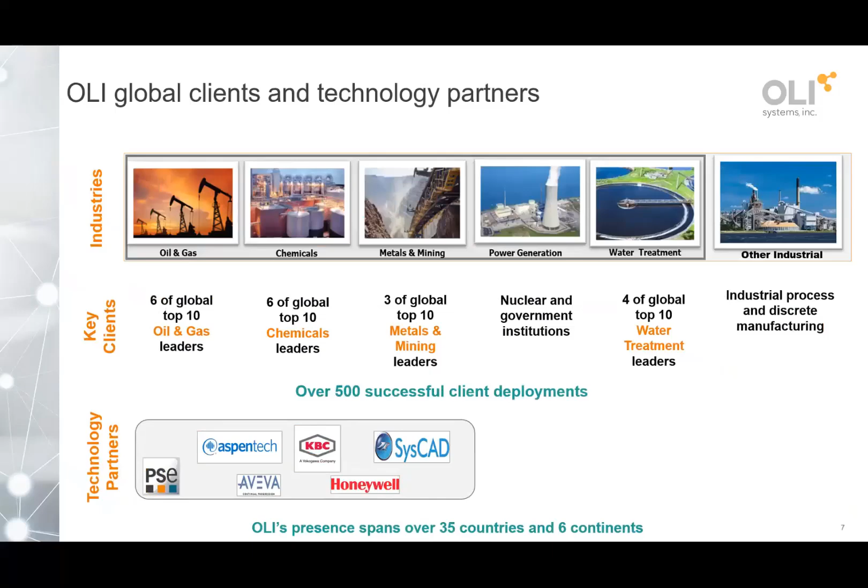So we also work with alliance partners. So we have relationships with AspenTech, with AVEVA, with PSE, KBC is a budding one that's going to be happening next year, Honeywell and SysCAD, so that when you're using us in the flow sheet environment, you can use us through one of the commercial flow sheet simulators.

What we like to say is it's the OLI engine that's delivering simulation power, and it delivers in a wide variety of products, as I showed you, right? So we have 3 different electrolyte frameworks that are available. The MSE framework, which has no concentration limit. It's our newest framework, and it has a lot of our newest chemistry.

MSE SRK, which is important if you're doing upstream oil and gas reservoir, especially if you're looking at extreme reservoir conditions, you really want to be in MSE SRK as opposed to MSE, because the SRK is being used for the dense phase and for calculating the hydrocarbons in the second liquid phase. So that's an important thing to remember.

And then finally, we have an older framework called the AQ framework, and Diana is going to take you through these frameworks in more depth, just to note that you will be able to really select the framework that makes the most sense for your case on a case-by-case basis.

OLI is well published. We're thermodynamicists, so we work with an equation of state and an activity model. We use the Helgeson equation of state. And for an activity model, it is a proprietary model, and it works with the minimization of Gibbs free energy.

Andre Anderko is our Chief Technology Officer. He was a postdoc of Professor Pitzer. And so you certainly will see Pitzer influence in our model, but it's not a Pitzer model, it's our own model. We published our models, actually, although I said it was proprietary, we published the equations in peer-reviewed papers.

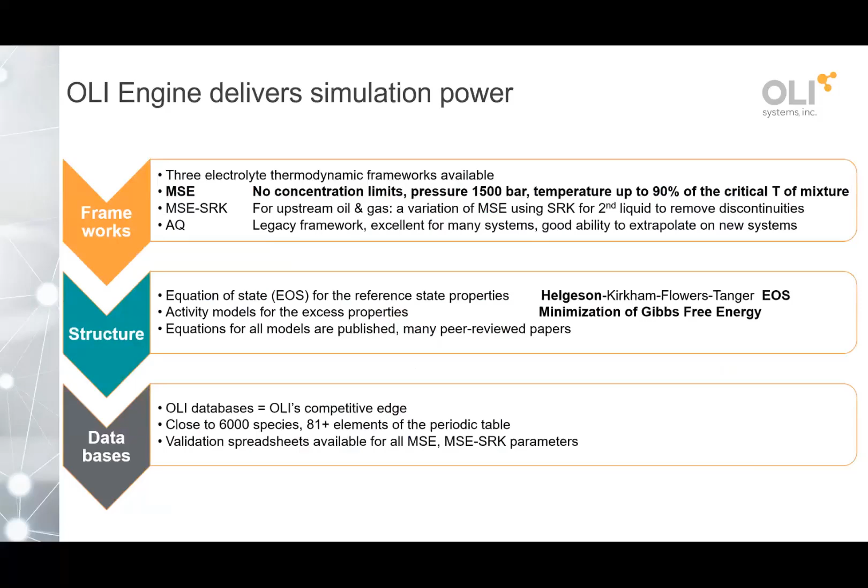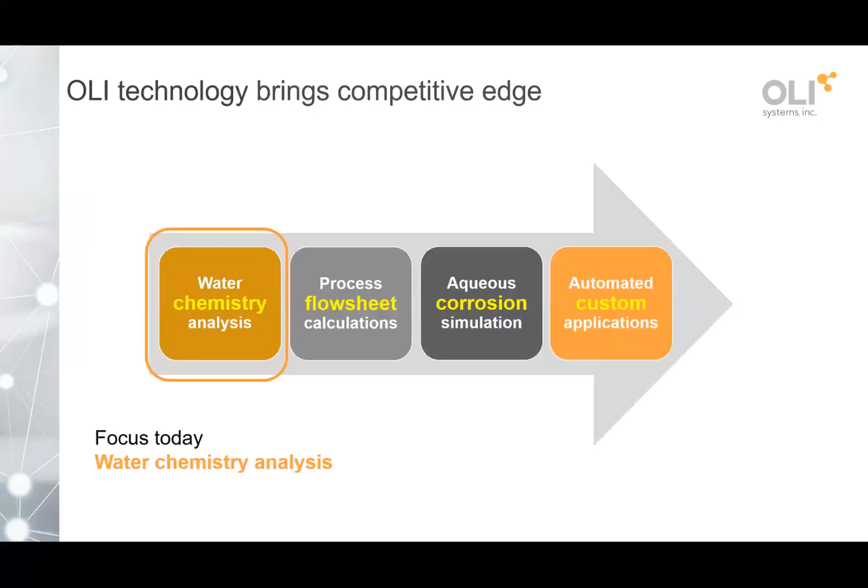So as I mentioned before, we bring competitive edge through either chemistry or flow sheeting or corrosion or custom applications. I'm going to just talk a little bit about each one in more depth. So, water chemistry analysis. This is the Stream Analyzer. We like to say it's a virtual laboratory on your PC. You get a blank slate of components, and you describe the components and the conditions, and we, in essence, run the experiment for you.

Remember that it's equilibrium based. It does distribution between solid, liquid, vapor, and second liquid. It predicts accurately on a multi-component system basis. Now, that's really important to keep in mind. A lot of our problems are going to be with few components so that you can get the calculations very quickly. But keep in mind that you can add any unexpected components, because what the OLI framework does is it takes binary first and then ternary systems, and it combines them together for what Andre likes to say are reasonable to accurate results when you put everything together in a multi-component system.

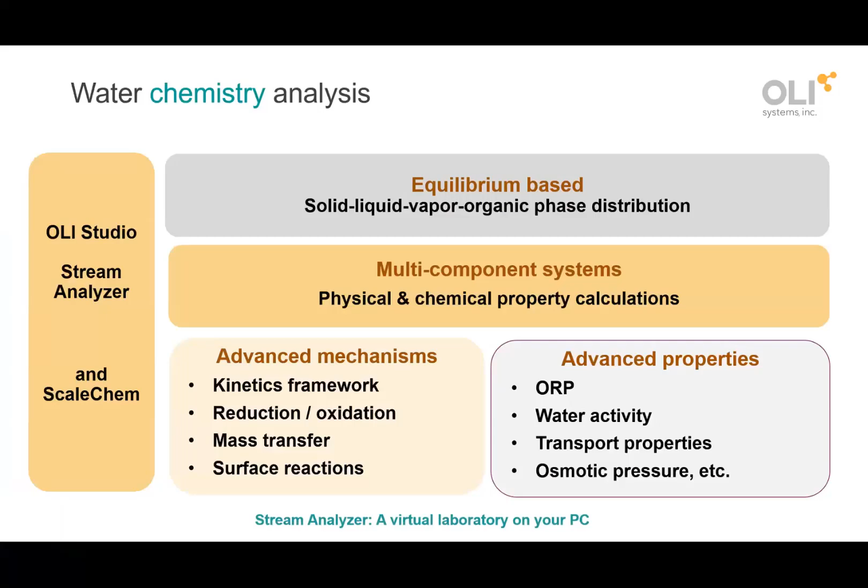What that means is very different from a system that has to be interpolated together or regressed together, so some simulators will give you an insert. So here's the way we understand potash chemistry, or here's the way we understand sour water stripping. But if you have, for example, water treatment, and you have an unexpected component that you are dealing with, you don't have to re-regress. You don't have to worry about whether it's outside the range of the model, because the model works mostly by adding components. So that's important to know. Lots of advanced mechanisms and advanced properties. I'm going to let the class speak for itself there.

In terms of process flow sheet applications, we have really two choices. We either can use an Alliance Engine when you're working with other thermodynamics, or when there's other features that you need in one of our commercial flow sheet simulators, or you can work in Flowsheet ESP when electrolytes are primary. This class is not about flow sheeting, but why do you use flow sheeting? You use it when you have multiple steps in an operation, or multiple units that you want to model, when you have controllers or recycle, and when you have multi-stage capabilities.

We have lots of Alliance Engine partners, and we have our own electrolyte system geared for industrial water treatment, where we have things like evaporation, crystallization, and membrane processing that are a little bit tailored for electrolyte processing.

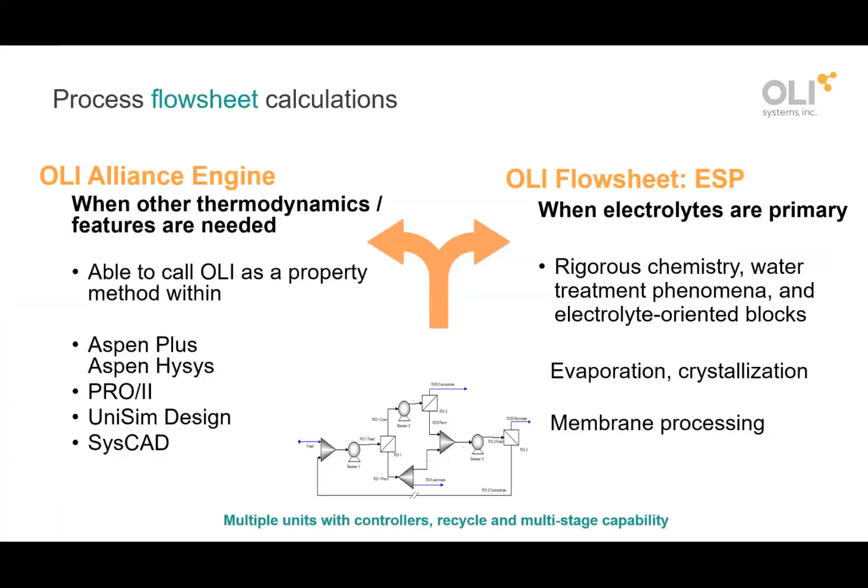I'm going to get this right before too long.

Okay, we also have corrosion simulation, which we might cover at the end of the class later on in day 2. If there is interest, we can take a quick look at it. But this class is not going to be about the Corrosion Analyzer. But keep in mind that we have different ways of predicting corrosion, either general corrosion or localized corrosion. We have stability diagrams, and also an EVS calculation, calculating remaining assets. And if you are interested in that, we can certainly work on that separately, not in this class.

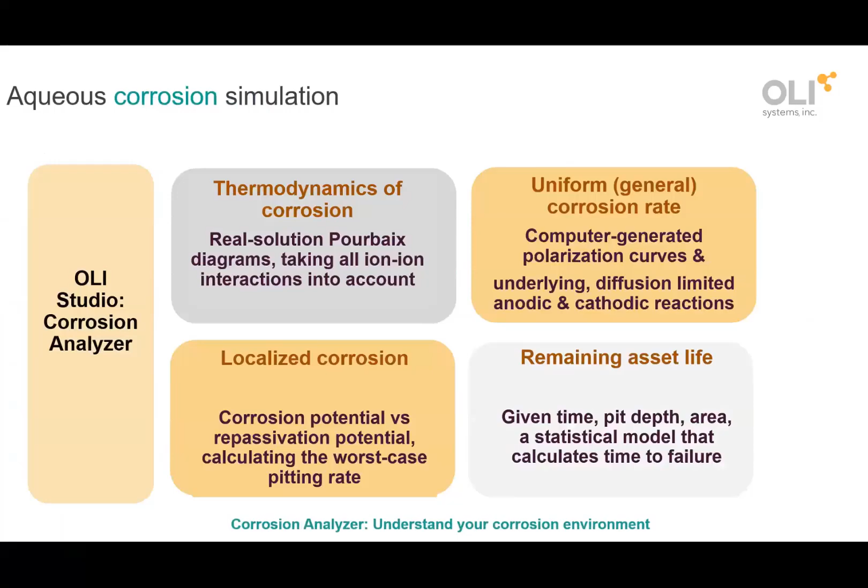Finally, we do custom calculations. This graph is quite interesting.

Excuse me? I'm sorry, I thought someone was speaking.

Because this little box down here represents OLI today. When I first saw it, I was offended. You know, OLI today actually does a lot. But what this really is trying to say is that you are water chemistry experts, and you are working with the software at this level, but we really can go beyond this level into something that's more automated, where we can do some kind of red, yellow, green flag indication of whether you have a scale that's about to form, or if the scaling tendencies are high.

We can move into different levels of cloud performance, and really our goal with OLI is to get into predictive maintenance facilities, become part of the Internet of Things, and really help clients make digital twins. So this is really OLI's vision for the future, and we are seeking partners. If you are interested in moving past the desktop capability that you have today into some of these automated areas, please let us know, because that's something that we are also interested in doing.

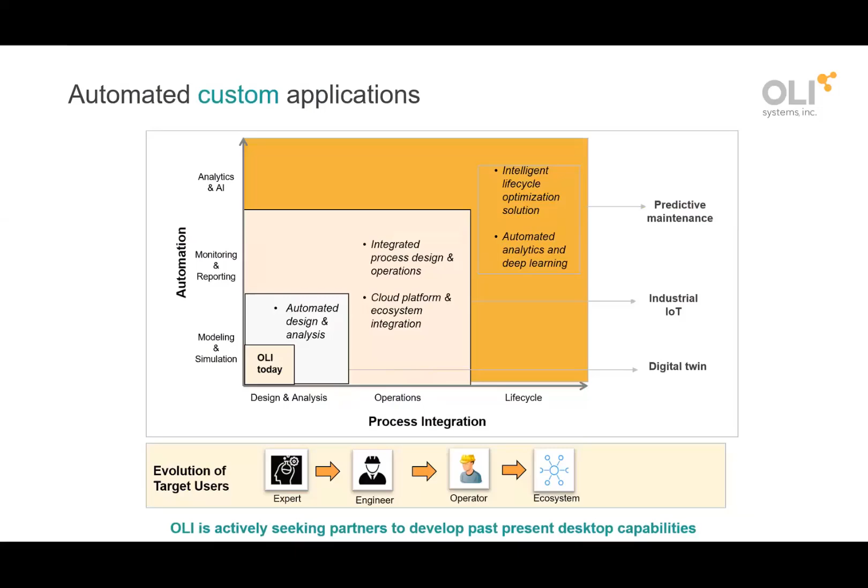Two more things I'd like to say, maybe a few more slides, but the key to simulation, and what we're going to be doing in this class, is interpreting results. Always, that's the issue.

Process simulation is pretty easy - well, not so easy - but you can get some input that you consider representative. You run it through the software, consider it a black box, get some output, and then you really need to ask yourself, am I modeling the physical process that I have? If I am, I'm in a really strong position to make recommendations and come back in and make modifications. This is really where we want to get, but we can't get there except through really the ground of interpretation.

So a lot of what you're going to learn today in the class, you're going to learn how to set up the software, how the software works, which features it has. But really, a lot of our focus and why we call it electrolyte modeling basics is so that we can understand how to interpret the results. Because that's really where you're going to get the power of simulation - when you start to understand, yes, I am modeling my physical process, so I can predict what's going to be happening tomorrow.

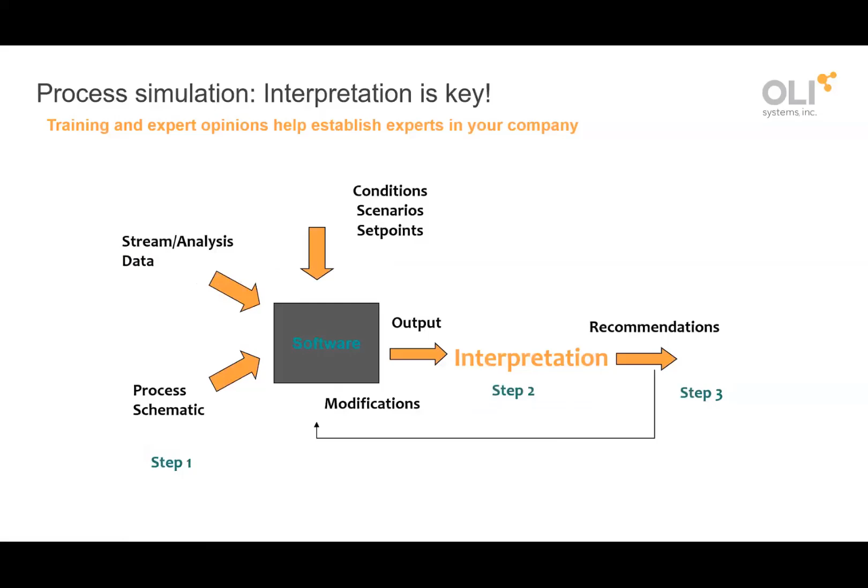So that's an important thing for gaining confidence in the system. If you can see that OLI has actually worked with data sets that cover the span of the range that I'm in, this looks like a credible result given what I see from the validation plots. So that's how we use them, and it's something to keep in mind.

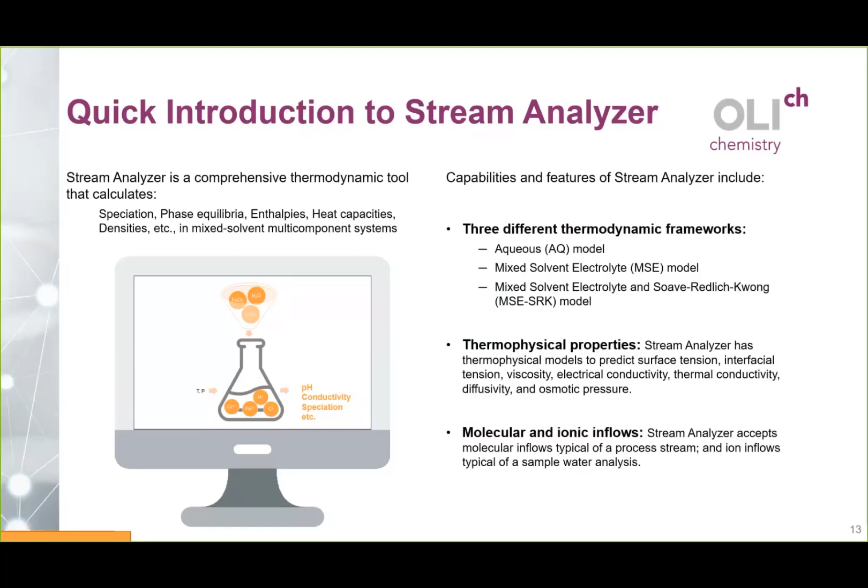So the first thing we are going to learn this morning, or this afternoon depending on where you are located, is the user interface. In the OLI Studio software, we have the OLI Studio desktop user interface, which provides the environment to create, analyze, and interpret the results of your application chemistry. I will give you an overview of the different windows and tools that you will be able to use within the software, as well as how to navigate the OLI Studio user interface.

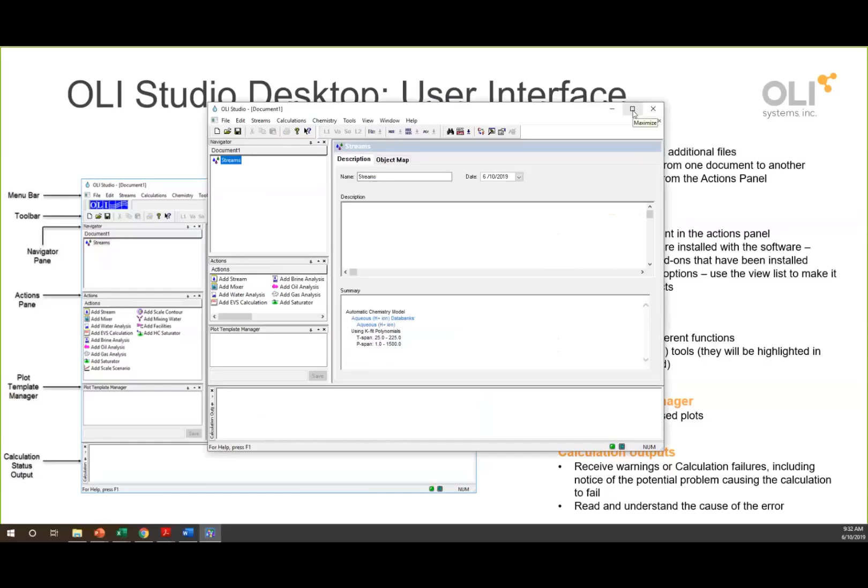If you have installed the software, you should be able to see the icon of OLI Studio 9.6. Just click on the icon, and this will bring up this screen, which is the OLI Studio interface. I will maximize this window just to make sure everybody can see it.

Does everybody have the software open at the moment? Yes? Yes, okay good, that's good. Okay, so let me just quickly go back to the presentation here.

I will start with describing the navigator panel. In this navigator panel you can open or add additional files, which makes it possible to access different documents very easily. So in here you create a new document, or you can always go and open a previous document you have worked on before. Let's say you open this new document in here.

So you can always access very easily several documents using the navigator panel, as you can see. You can open several documents in this navigator panel. Now this navigator panel also contains the list of streams and the different calculations that are active within the file.

You will find four different levels of calculation. The first level is the global stream level. In here, when you click here, you will be able to set up units, the name style of your components, and the general preferred options.

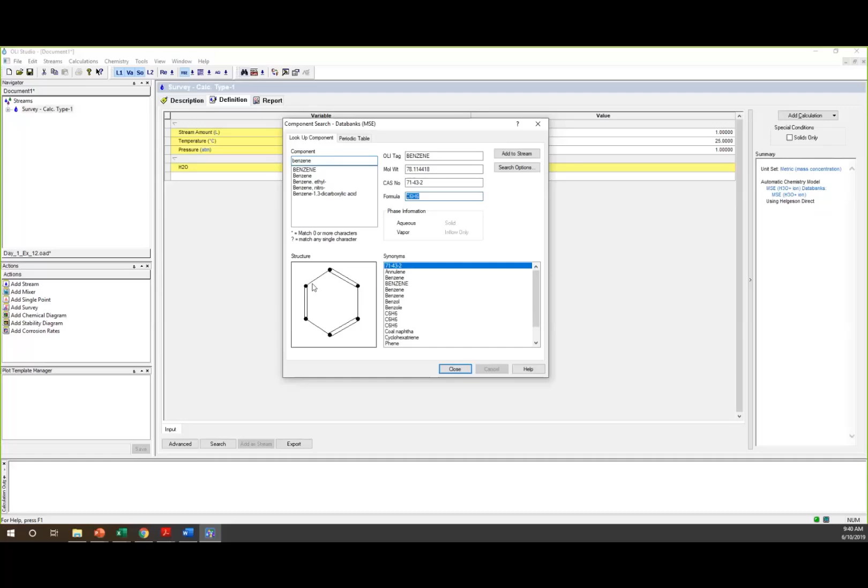Whenever you are working, for example, we have selected here the MSE data bank, so it's going to search a component within this data bank. If you want to know if the MSE has benzene, for example, you can type benzene, and it finds the component in the software, letting you know the molecular weight, the CAS number, the formula name, etc. You can always make sure if a component is in our database using this component search option.

The next tool that we will use a lot is this names manager. It looks like an NaCl icon.

So we have the names manager. This allows us to change the way the component names will appear on tables and reports. We have three different types of style options: the name, the formula name, or the OLI name.

Finally, the one that we will use the most is this units manager, which allows you to change to preferred units for your calculations. You can click here in the customize button, and then change if you want units in volume, concentration, mass fraction. You can always edit this just by accessing the units manager button here.

So that is the bar that we have, the quick access bar up here.

Now you also see this plot template manager to the left. This is an option where, when we are plotting a lot of different results, you can save and have access to commonly used plots. I will show this later also in the course, how to use it.

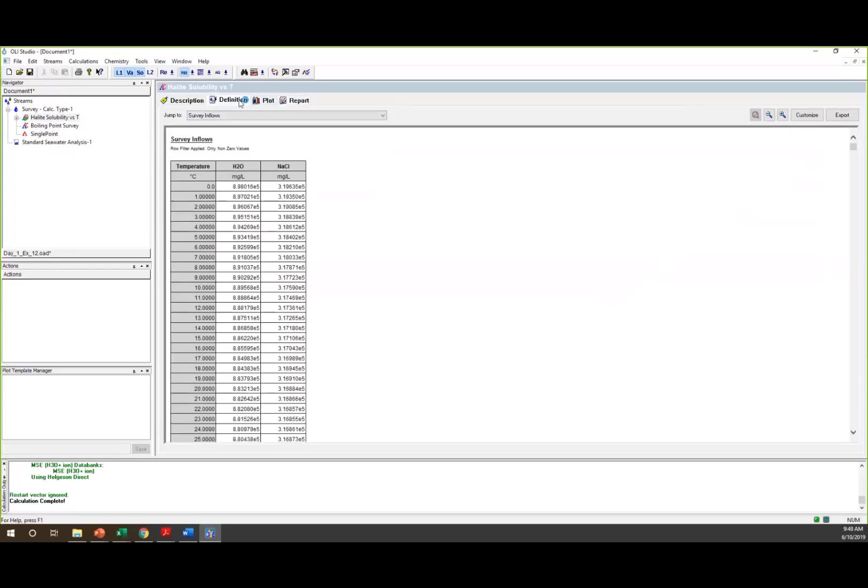And also in the workspace, you will find the summary section, this small white area to the right. In this summary section, you will have a quick summary of the stream definition and also a quick summary of the results of your simulation.

So this is only for the survey calculation, but you will see that whenever we are doing corrosion rate or a Pourbaix diagram or water analysis, these tabs up here will change. As we go in the course, I will introduce and explain each one of these tabs for each calculation type. Most of the time, our workspace will look very familiar, but I will make sure to introduce new parts that we see as we go in the course.

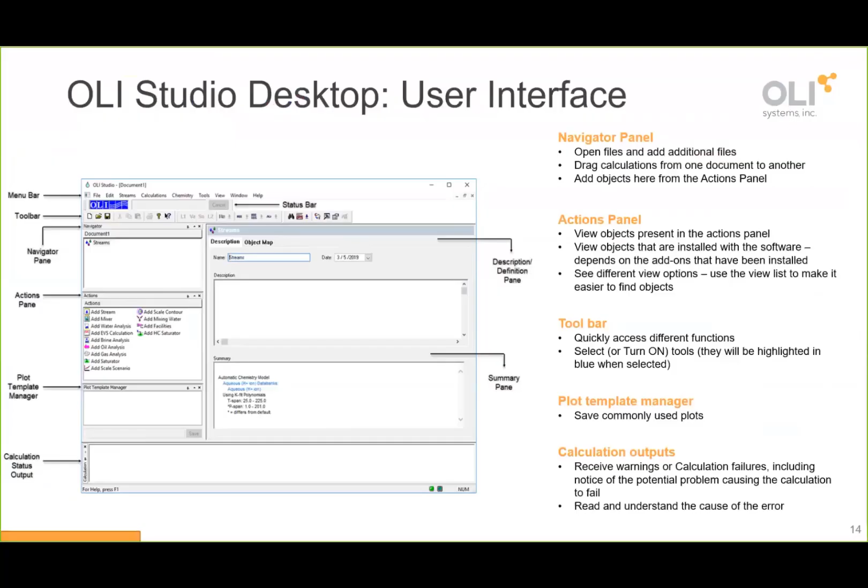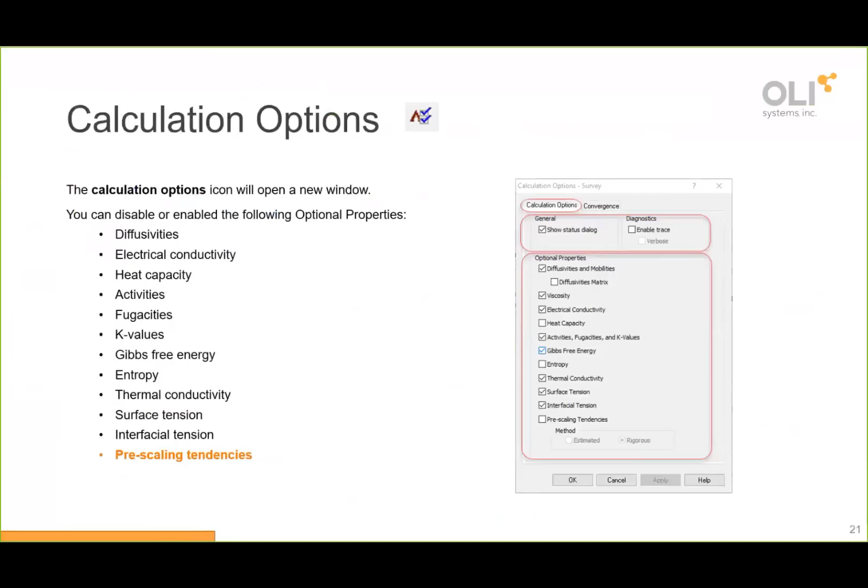Okay, so this is what I already talked about, the toolbar, the names manager. You will have these slides for future reference too, so that you remember where to find all of these specific options. This is the object library, the workspace.

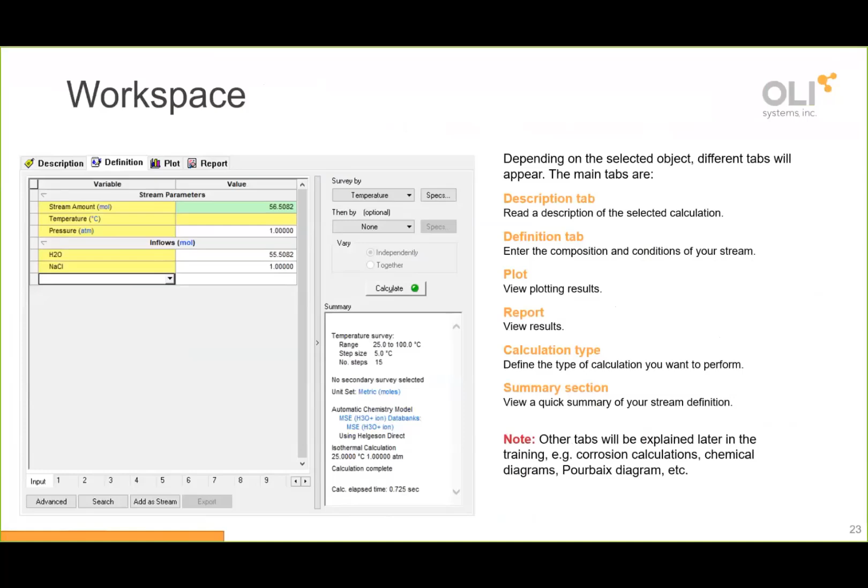If the water content is less than 70% of the stream, then it would be a good idea to use the MSE framework. And this is a preferred data bank when we have very saturated solutions. So if we have a very concentrated salt solution, the MSE is the framework to select.

And finally, we have the MSE-SRK. This MSE-SRK was developed specifically for upstream oil and gas applications that contain light hydrocarbons like methane and also CO2 and H2S, and when we require high pressures above 80 atmospheres. So this framework will be only for upstream oil and gas applications, and when we are dealing with normal temperatures and pressures, then we can either go with the AQ or MSE.

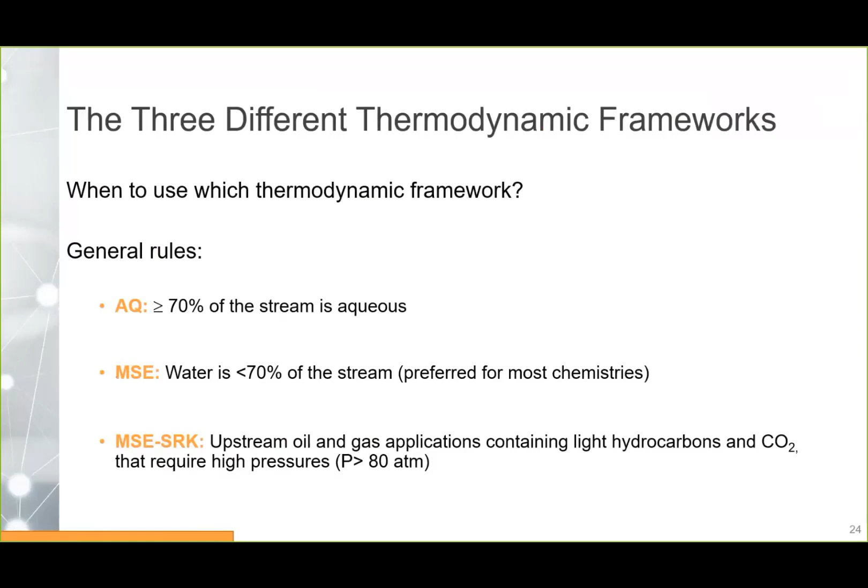Currently, OLI is developing a feature that will help the customer to select the best framework for his or her application. So it's coming up in a future release, but at the moment this is just a general rule that I personally use when I'm doing simulations. Okay, so this ends the presentation part about the user interface in OLI Studio. We will have more time to go through it, and with the examples, we will get more familiar with it. And now we can start doing work in the software.

But, okay, so it's 9:53 a.m. Pat, do you think we should get a break before we... I would actually see if we can go a little bit longer to do the first calculation and then break, because we're waiting to get into the software. And it won't take you that long.

This add water analysis is another way to create a stream, but in an ionic form, and then we will be able to do what we call a reconciliation calculation. And for the corrosion analyzer tool, we have the add stability diagram option and the corrosion rates. So we will start with single point calculations. Single point calculations are used to find information at one specific equilibrium state. These are the simplest set of calculations in the software, and we have 13 of them. And we will cover the majority of them.

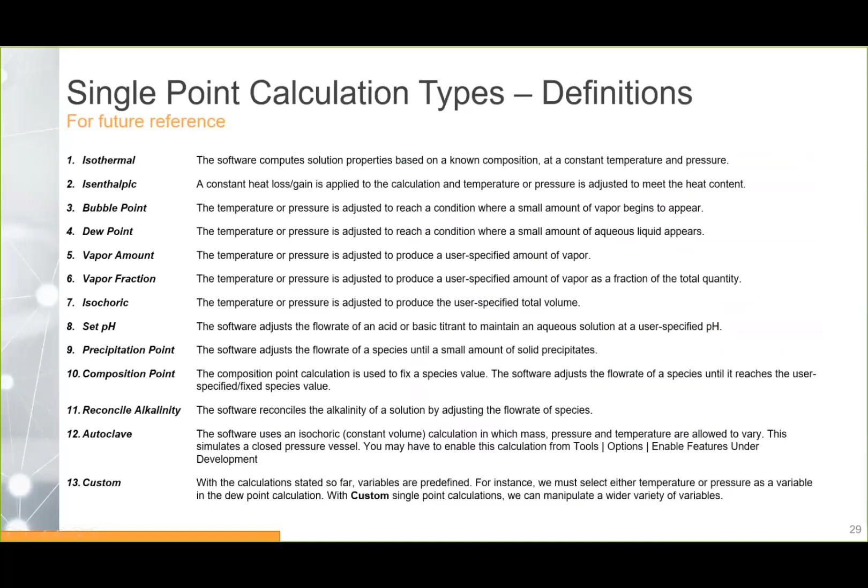I'll cover isothermal, bubble point, dew point, vapor fraction, precipitation point, set pH. And in here you will see, this is for your reference, if you want to remember what an isothermal calculation is, a bubble point, composition point, etc. So again, you will have it here for future reference. So, okay, let's go into our first example.

We will calculate the properties of a 1 molal NaCl solution. So I will show you how to set up this isothermal calculation, and then we will explore where to find the results of the simulation. So let's start with a new document here in the software. So let's bring the software. Oops, what happened here? I'll just start a new document. And the first step is to add a stream.

So we click on this, see my actions panel went away. When we click here in the global stream, we will be able to see the add stream icon. You can add a stream either by double clicking this add stream, or you can also go to Streams, Add Stream, and it will add a new stream. Okay, I don't want this extra stream, so I will right click and delete it.

And once we have created this stream, we can change the name to isothermal calculations. To do that, you can either select it and then hit the F2 key, and it will allow you to change the name. You also have the option to double click on it and change the name. Right click is the other option, and then rename. Or you can go to the description tab, and then we can change the name here to isothermal calculations.

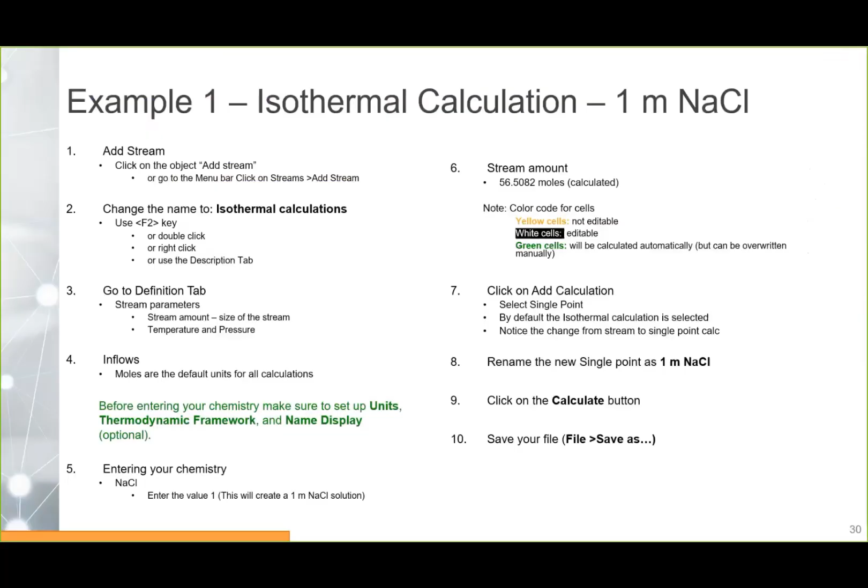Okay. So the next calculation that we are going to do, and I would like that everybody just follows with this calculation, is the isothermal calculation for 1-molal iron chloride. We are going to add a single point calculation, and we are going to name it 1-molal iron chloride.

And before we do the isothermal calculation, could somebody give me an idea of the pH of this solution? What do you think would be the pH of a 1-molal iron chloride in water? Somebody wants to guess? The previous calculation, we had a pH almost 7. We'll go with 6. You would say 6. JC says 1. Oh, wow. Okay. And Jan says 6. Okay. So let's set up this.

So if we click on the isothermal calculation, then we can add a single point, either here or add calculation. Let's name it, double click on it, 1-molal iron chloride. And I want you to notice that when we set up this isothermal calculation, the NaCl and the 1-molal was editable. It's in the white cell, so you can edit this. But once you add a new calculation level here, then the NaCl is in yellow. You cannot change this. However, you can continue adding more chemistry here.

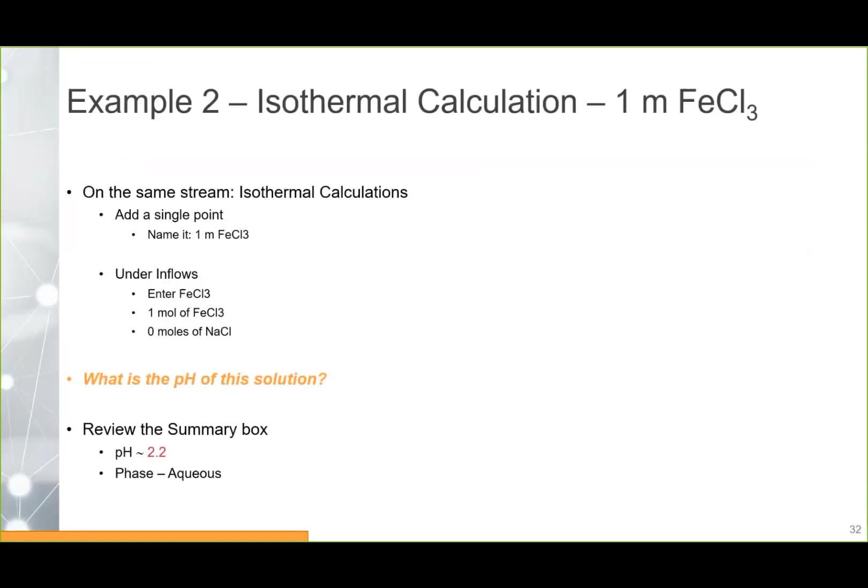Definitely the pH is very low. This is one of these salts that when they react with water, we have these hydrolysis reactions, and they form this Fe3+ in solution. This Fe3+ then reacts with water and starts to release H+ in our system. And this H+, as it increases, as we dissociate this iron chloride in solution, then we have more and more hydrogen in our water, so our pH is going to be very low because of this minus log of the concentration and the activity coefficient.

Now, the software is not only calculating this concentration of hydrogen plus in solution, it's also calculating this activity coefficient, and that is how the software is calculating this pH. Okay, so let me just go back to the software.

We can go to the report, and in the report let's go to the output tab here. If we right click on this output tab and then go to sections, then go to the aqueous section here, you will see all of the different speciations that the iron 3+ causes.

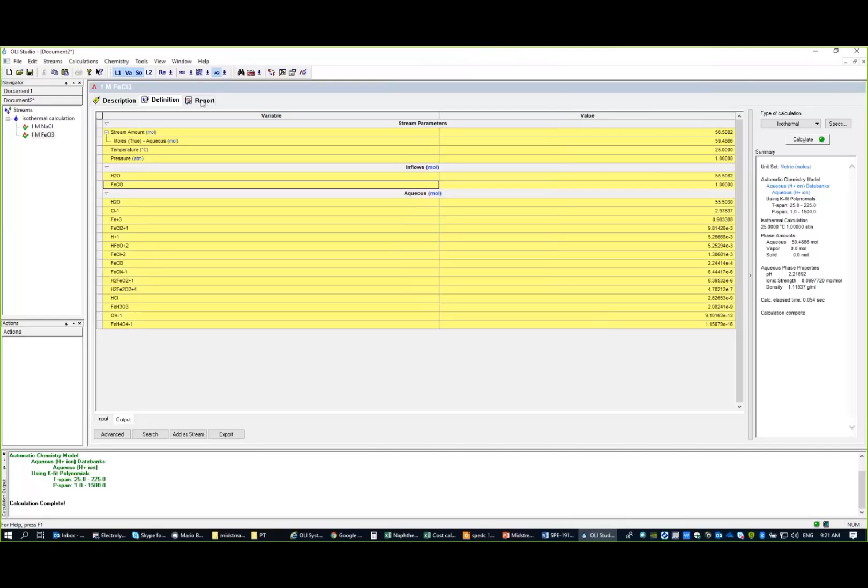So, for example, if you want to see the species, what you need to do is scroll down and you will see the species right there, and the concentration.

So Diana, if you want to see these species in percentages, is that possible, as opposed to whole numbers? Yes.

Yes, definitely. Jan, could you please scroll down really quickly? I just want to see one thing. You can also analyze, you see the element distribution. Well, this will be specifically for element distribution, but what you can do is always change the units.

And instead of saying show me moles, you can always show the mass percent, mass fraction, mole fraction, etc. You will be able to see that when you select that, and there will be tables where you will see the percentage of the total for each one of the species.

Let me see if I can just, okay, I'm going to take control back, and then I will share my screen. Yeah.

Share content. Okay, this is my screen. Let me see if I change the units manager to mass fraction. So let's apply this.

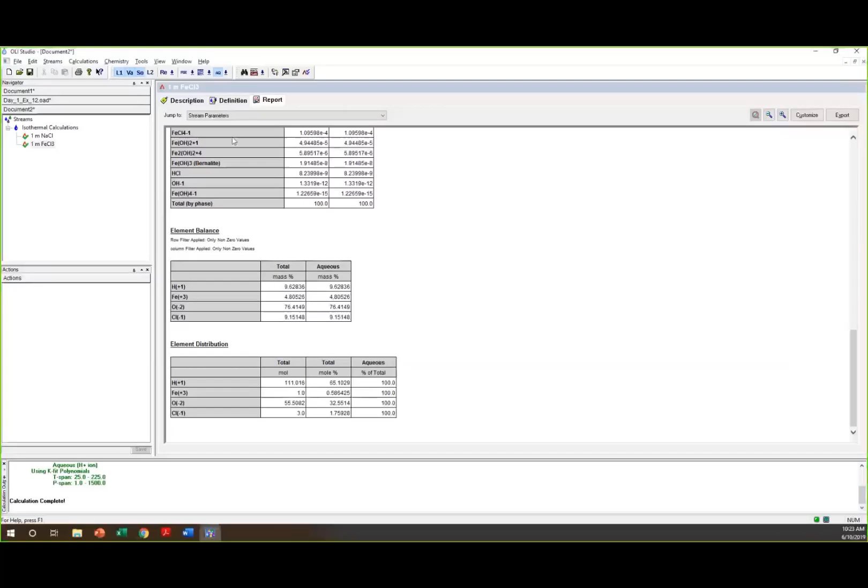And I was talking here like, oh, click here.

Okay, so when you go to the units manager, you can always change the metric batch and mass fraction units, and this will change all your units. Then you go to the report, and here you will see all the species as a mass fraction, mass percent. You will also be able to see the element distribution, the oxidation state of every single element, and the total percentage.

That's perfect. Thank you, is this what you were asking? Yeah, absolutely. That's okay, excellent, that's great. Thank you, okay.

Okay, so it's important that we get very familiar with the isothermal calculation, because once we get comfortable with it, then we can move to more specific calculations. So this is the isothermal calculation, okay.

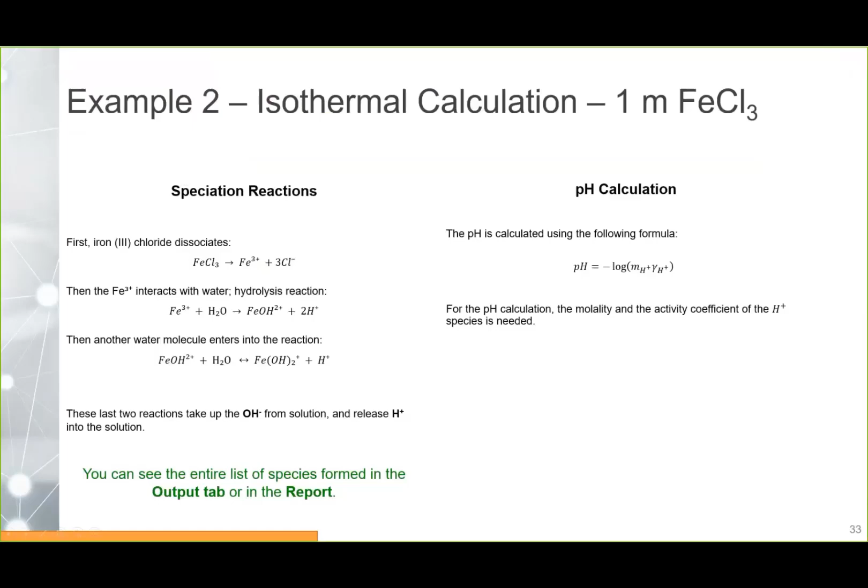So now we are going to transition to the phase equilibria calculations. The next examples I'm going to cover are the bubble point, dew point, precipitation point, and the vapor fraction.

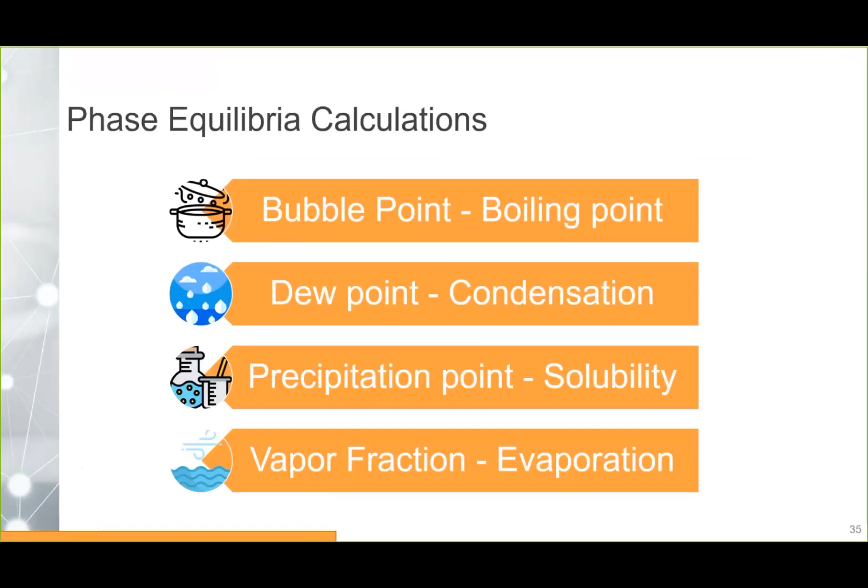The bubble point is whenever you want to know what is the concentration effect on the boiling point or the dew point, so you can study that. The precipitation point is where you want to understand the solubility of a specific salt in water. And the vapor fraction I find very important, because sometimes you want to do an evaporation step and you want to analyze what solids precipitated out. So those four are the next calculations we are going to cover.

So example number 3 for today is bubble point. We will start by computing the bubble point temperature of a 6 mass% acetone solution at a constant pressure. So this will be under isobaric conditions. Then we'll change the calculation to the bubble point pressure at a constant temperature.

Okay, so let's go back to the software. The next step, or the first step we need to do, is to add a stream. So double click on add stream, on the add stream icon. So we have a new stream. Okay, let's rename it bubble point.

And for this example, let's use the MSE framework. So click on the MSE framework. Okay, and now let's enter acetone in the inflows. So let's just type acetone.

Now I want you to notice something here: the software immediately changed the name to the formula name. If you mouse over the name, you will see the different names, the acetone formula name, the OLI name. And if you don't like how the software is presenting these names, you can always go to the names manager and say, display my name, because I feel more comfortable reading acetone than CH3, etc. So let's leave the default name for this example.

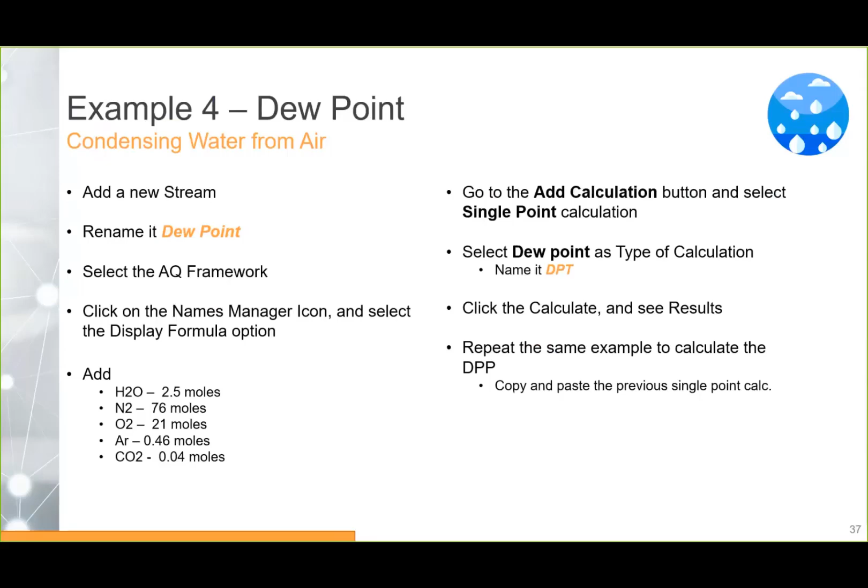I know that the dew point is also very useful in corrosion studies. People want to understand the composition at the dew point, or the first drop of water formed, because once they know that specific concentration, they can predict the corrosion that can happen on a pipeline. That's another application of the dew point.

So for the dew point, let's add a new stream and name it dew point. I will use the AQ framework for that. For the names, I want to go back to the formula and enter the following components. So we have water, I want to enter... yes?

So if we're modeling gas, wouldn't we want to choose the MSE framework? Yes, we could also, actually the MSE framework would be the best one to use for this specific example, because we have water, though we don't have very much amount of water in the stream. So let's change it to MSE. Yes, you're right, MSE would work better for this case.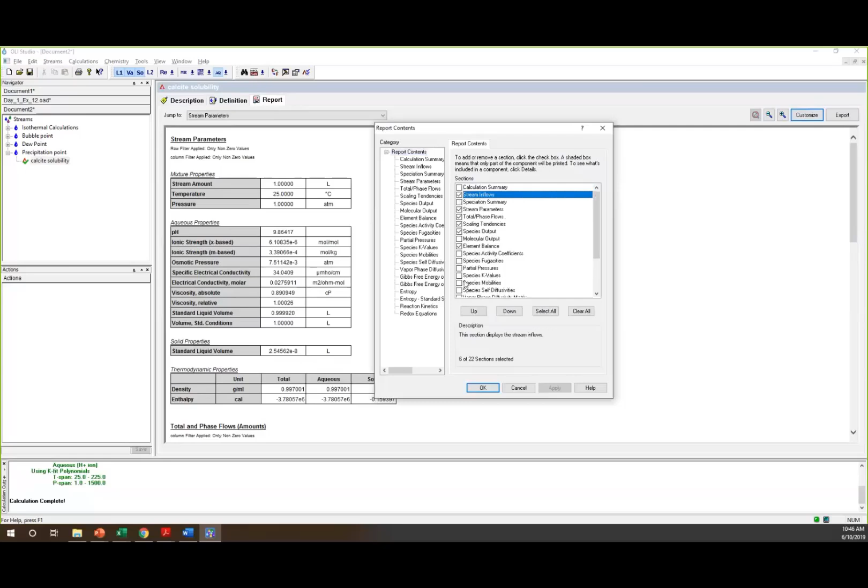So again, in the stream inflows, it says in my output what the software had to add was 12.34 milligrams per liter of calcium carbonate to precipitate a small amount of calcite. And down here, in the total and phase flows, you can see that the solid is also a very small amount, set as 1 times 10 to the minus 8 of the total stream amount. It's always going to be a very small amount for the software in order to calculate this precipitation point, the dew point, or the bubble point.

Okay, any questions about this precipitation point calculation?

You can also find here the pH is very high for this calcium carbonate solution. Okay, so I will assume this precipitation point is clear.

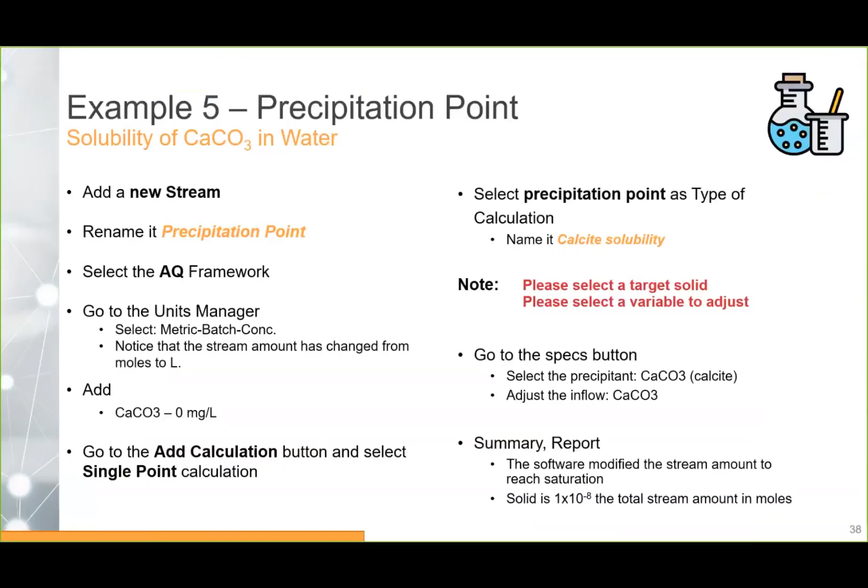Now we are going to move to our last calculation for phase equilibrium, and that would be the vapor fraction. The vapor fraction calculation allows us to set a specific fraction of the total stream in the vapor phase, so this type of calculation can be seen as an evaporation step. This calculation is very identical in nature to the bubble point calculation, except that instead of the software defining the vapor amount as 1 times 10 to the minus 10 of the total stream, the user defines the vapor size in either mole fraction units, that will be the vapor fraction, or mole units, that will be the vapor amount.

So to illustrate this type of calculation, we will evaporate a brine to study its final composition. So let's go back to the software and let's add a new stream. And we are going to name this new stream as evaporation. Okay. We can select here the AQ framework, and I want to change these inflows

units to mass fraction. You can see that there is a hyperlink here, and you can click on it, and that will bring immediately the units manager for this calculation, and I want to change those inflows units to mass fraction. So I select mass fraction, and this will be the unit, and then click OK.

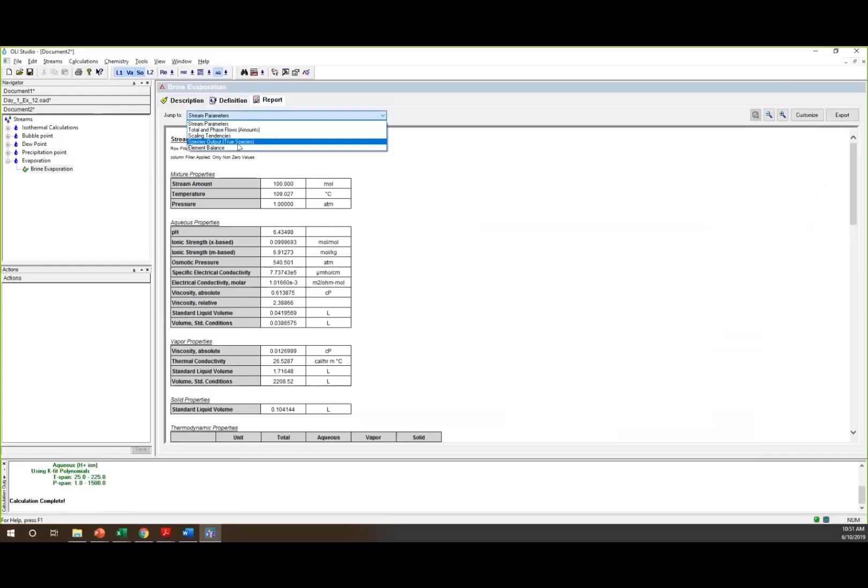Okay, and let's go to the report really quickly just to see the phase flows amounts table. And in here, since we entered 100 as the total stream amount, now I have 95 moles in my vapor phase, and 2 moles in my aqueous phase, and a solid was formed. 2.9 moles of the solid phase was formed.

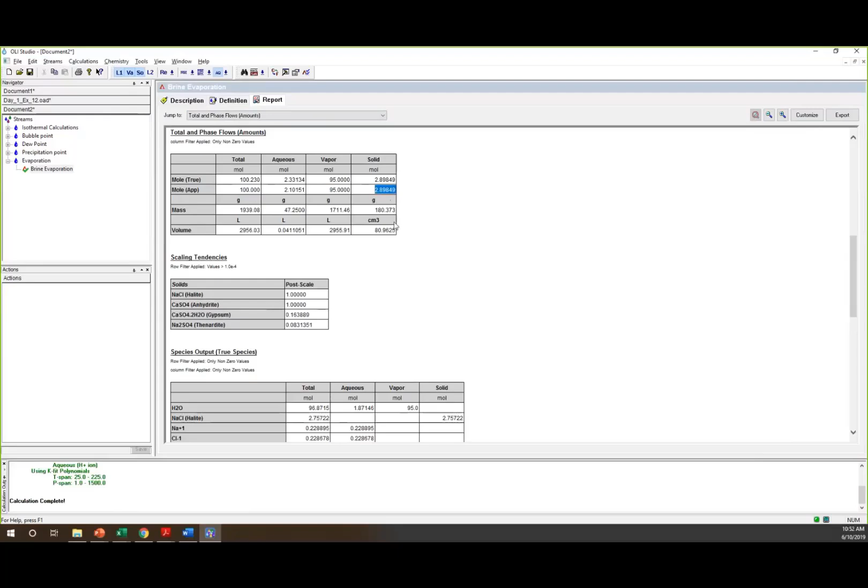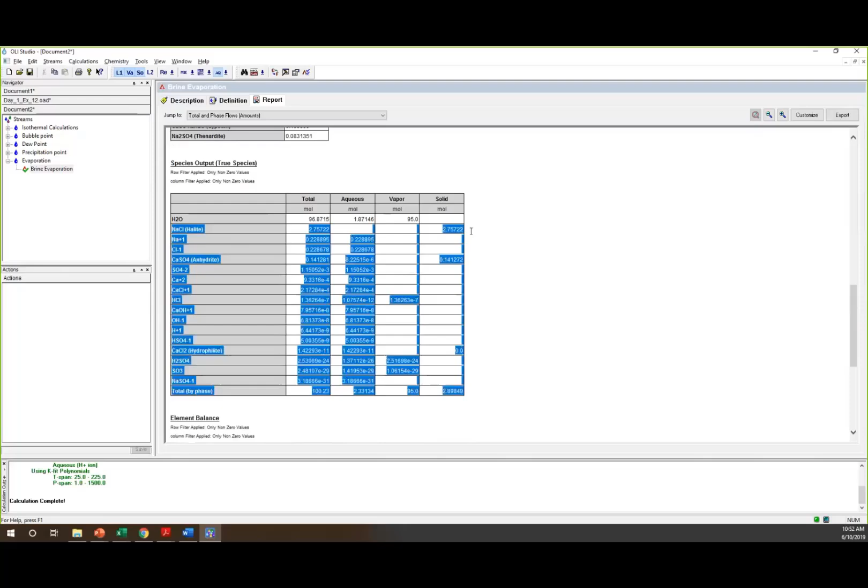So I'm also interested to know which solids were formed in this evaporation. So what I'm going to go to now is the species output table. And in this species output table, you can see I'm precipitating halite, sodium chloride, with 2.75 or 2.76 moles, and I'm also precipitating anhydrite, 0.14 moles. So you can always come here to identify how much of a specific phase has formed for this evaporation case. Okay?

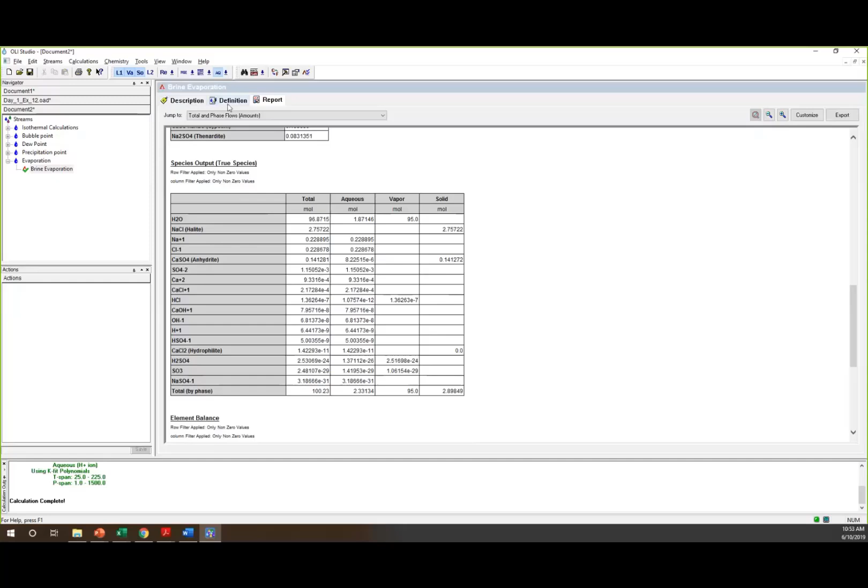Questions about this vapor fraction? This is very useful when, for example, we are doing evaporation in lithium ponds, and we want to know what we are precipitating. And if you don't want to form a specific scale on your pipe or something, you just want to avoid a specific evaporation rate. So this is a very good calculation for that.

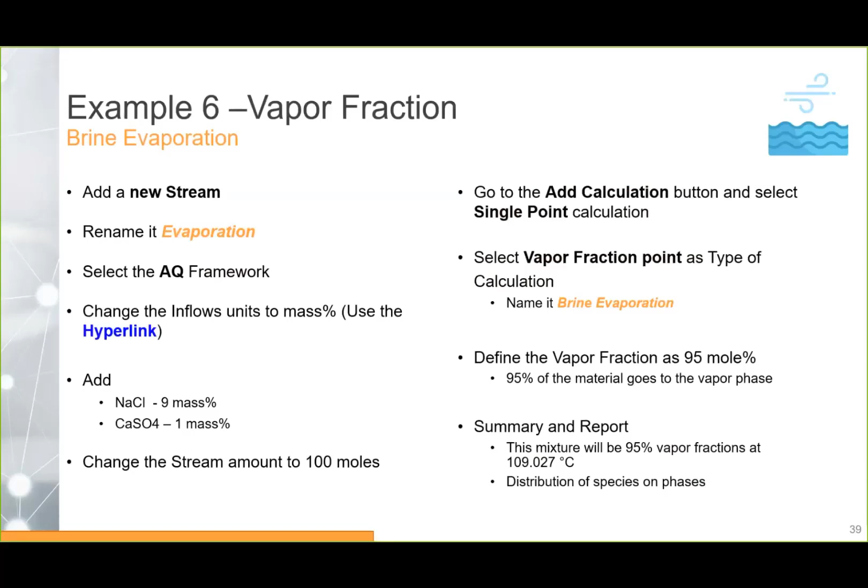Okay, so since we have one more, oh no, it's 11. Okay, so who is here? We have Adentia here, good. Tracy's here. Who else is here? Yes, here. Good. Okay. I'm here too. Great. So it seems most of us are back.

So I will go a little bit quicker for these two examples because I also want to cover survey calculations today so that we can pay more attention to water analysis in the next session. So now I will do two more single points. This is very important for water chemistry. And these are the set pH and calculate alkalinity. Okay.

So the next sample is set pH. The set pH calculation is very useful when we are either analyzing or designing a process. It allows you to create a solution that conforms to a pre-measured pH. Other applications could be designing a system to meet an operational pH or testing the impact of adding an acid or a base to a system.

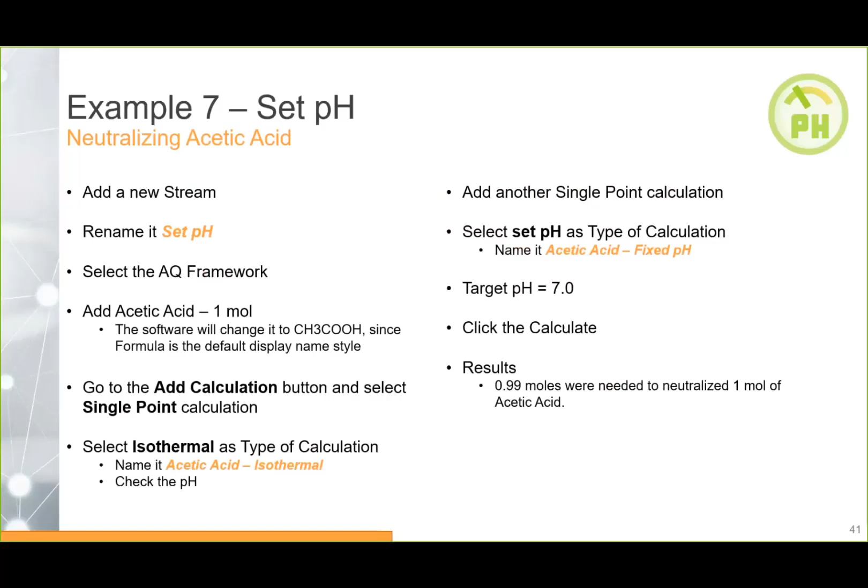So what we are going to do in this example is compute the amount of base titrant required to neutralize a 1 molar acetic acid solution. So let's go back to the software, and I'm going to add a new stream.

And then I'm going to call it set pH. For this calculation, the AQ framework is good, and I want to add acetic acid in my inflows. So we have acetic acid, and again, it changes to the formula name. I will leave it as it is for this example. Then we are going to add 1 mole of acetic acid.

The next step then is to add the single point calculation. So add calculation, single point. And I know that we are going to do a set pH calculation, but let's run first one as an isothermal calculation to find the current pH of the solution. So at 25 degrees and 1 atmosphere, the pH of the solution is very low. It's around 2.4.

Okay, now that we know that this is a very low pH, we want to neutralize this. We want to take this solution to a pH of 7. So the next step is, we are going to change the type of calculation to set pH. Okay. So once we bring the set pH calculation, there are 4 new rows. It's going to ask you, what is your target pH? This is a fixed variable, so it's a fixed number. So we said, we want 7 for the solution.

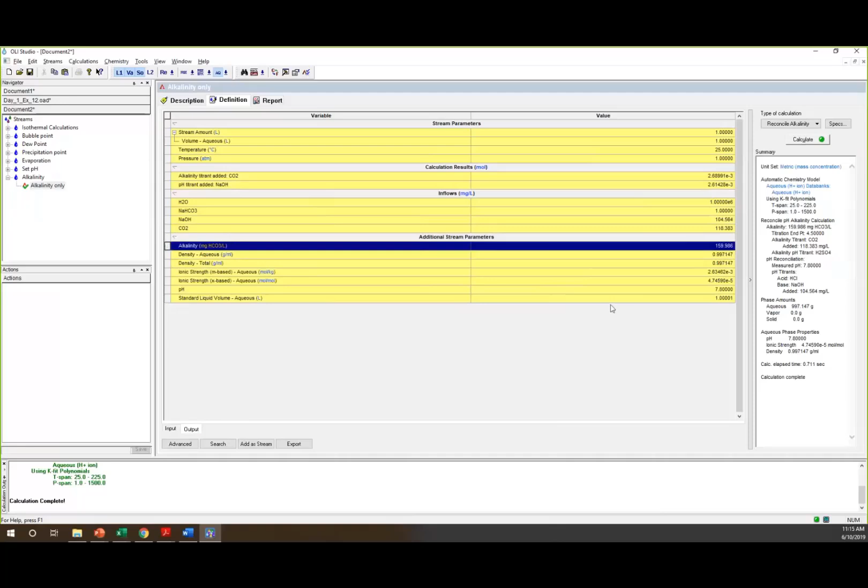Now, if you want to see the values of alkalinity and pH, you can right-click on the gray area, go to Sections, and then click on Additional Stream Parameters. Okay? Now, in here, you will see the alkalinity value, which the software matched at 160, and the pH, 7.0.

Okay? Now, if you don't want to report this alkalinity as bicarbonate per liter, you can also click on this hyperlink unit, and you can change your units to carbonate per liter. Oops, I'm failing to go there. Okay, so milligrams of carbonate per liter. And then click OK, and it will show you the value as carbonate per liter.

Okay, any questions about this alkalinity calculation? At the beginning, when I was learning about this, I was a little bit confused. So I just want to make sure that I'm doing a very good job here trying to explain what reconciliation means, especially because we will be using this for water analysis and scaling tendencies, which is very important for the water chemistry industry. Any questions about this? It's all clear? Okay.

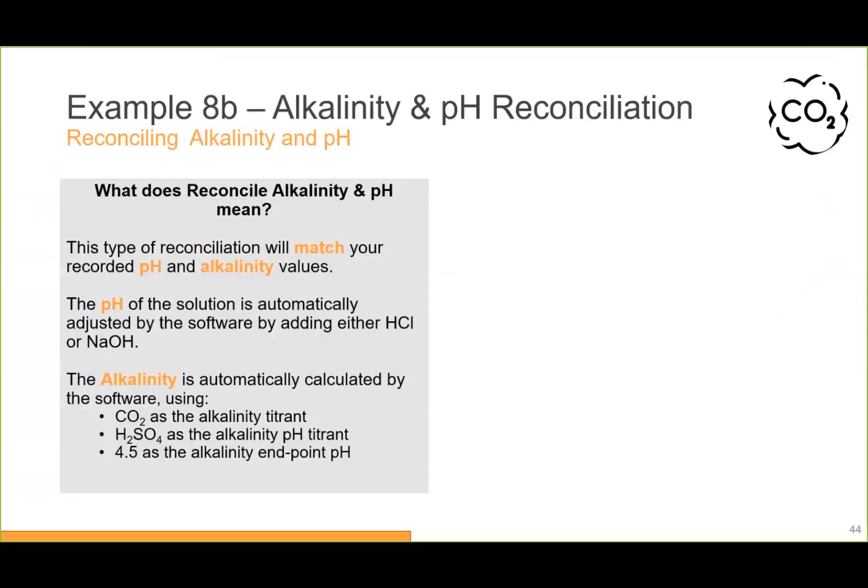So this ends our demonstration for single point calculations. And then we will start working on the second type of calculations, which are the survey calculations. Okay. And so now for the survey calculations, this can be considered as a series of single point calculations. So within the software, we have three different ways of setting up a survey calculation. The first one is the single survey.

In here, you can choose one independent variable to study its effect on a specific property. For example, you want to study the effect of temperature on density. So you can do that with the single survey calculation. Then we have the dual survey calculation. And in here, you can choose the effect of two independent variables. Could be temperature and pressure on the solubility of a gas.

And then we have the survey by changing the single point calculation type. By default, as you saw before, the software has the isothermal calculation as the default. And you can go and change the type of calculation to, for example, a precipitation point. And I will explain this type of survey in more detail as we go in the course.

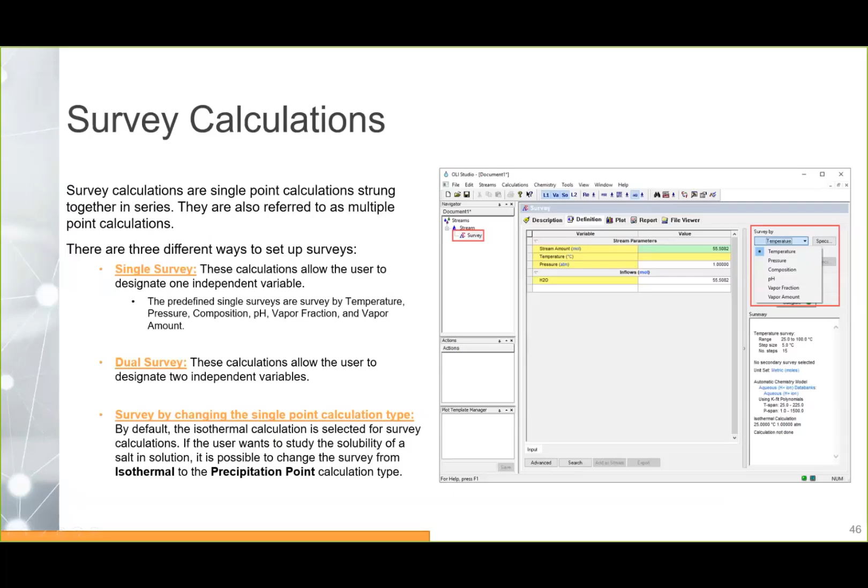So the first example that we are going to do with survey calculations is a simple temperature survey. What we are going to study here is how a four-phase mixture partitions as a function of temperature. And the composition of this stream will contain primarily one component for each phase. So for example, for the aqueous phase, it will have water. For the gas phase, it will have methane. For the organic phase or second liquid, it will have decane. And for the solid phase, it will have sodium chloride.

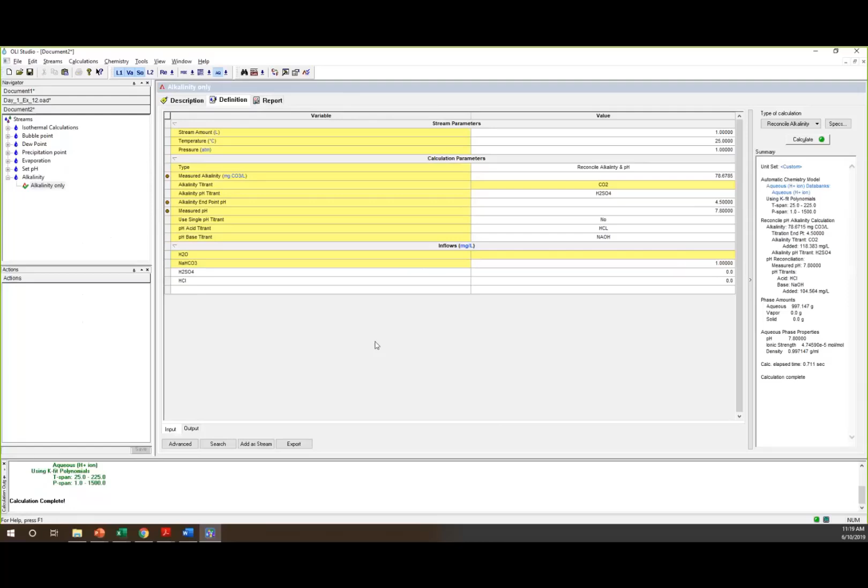Okay, so let's go to the software and let's add a new stream. And this new stream, we are going to call it survey calculations. So in here, we are going to put different types of calculations. For this calculation, let's change it to the MSE framework. And the metric batch moles, the units by default are good. We're good with that. The next step is to go to Add Calculation and select the survey calculation. Okay.

So by default, the survey is by temperature. That's the default survey that the software selects, and that's the survey that we are going to do for this example. Let's name this survey temperature survey. Temperature survey. Okay. Then in our inflows, let's start adding. So the first component will be water, 55 moles.

Then we have methane, CH4, and that will add 15 moles. The next component is decane, so I'm going to put it as the name, decane, and it should recognize it. It changes to the formula name. Let's put 15 moles. And then we have sodium chloride, and that would be another 15 moles. That will give me a total stream amount of 100 moles. That is being calculated in this green cell.

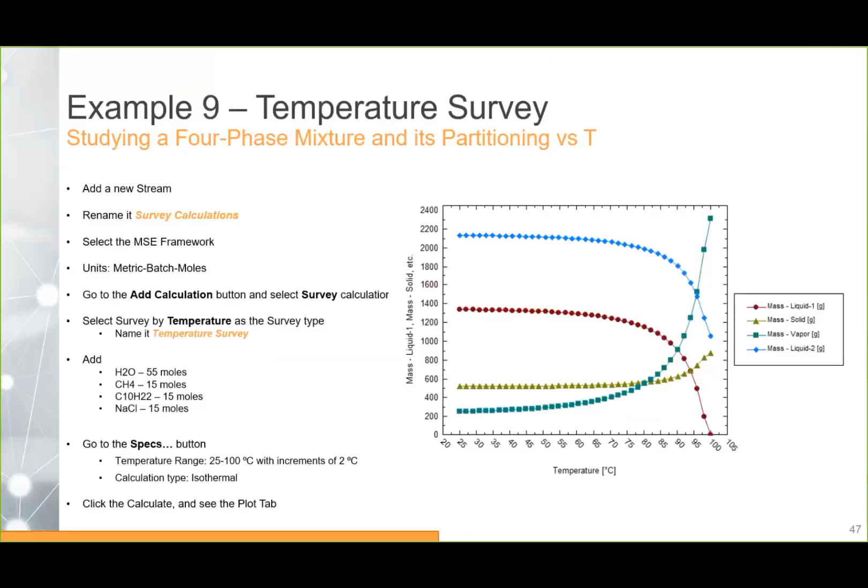Okay, so then we have to cover some other survey calculations, so let's keep going for this course. The next survey we are going to do is the carbonic acid system as a function of pH. We are going to do the pH survey.

Okay, so let's go to the software and add a new stream. No, sorry, maybe below the survey calculations, just add a new stream. And let's name it... a new survey calculation. So under survey calculations, let's add a new survey, and then let's name this survey as pH survey.

Let's select the AQ framework for this survey, and I'm good with metric batch moles. I want to understand the carbonic acid system, so I'm going to enter CO2 as my inflow, then enter 0.001, or 1 times 10 to the minus 3 moles.

For the survey type, let's change it to pH survey. Now you see that the target pH here is highlighted in yellow, meaning we need to provide a range. That range has been predefined by the software from 0 to 14, with a step size of 1, and a total number of steps of 14.

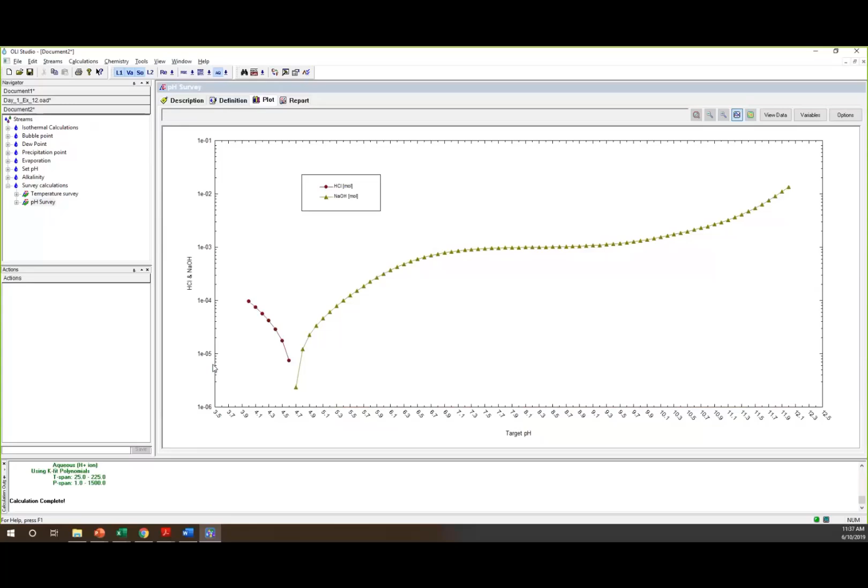So it's telling me that the software added a small amount of hydrochloric acid to reach up to 4.6 pH, and then it started to add sodium hydroxide to reach the target pH.

But this is not the target variable that I want to display, so let's change those variables. Let's go back to the linear scale—right click here and unselect the logarithmic scale—and change the variables that I want to show here.

Let's click the variables button in the top right corner of the plot, and this will bring up a new window where you can select all of the data you want to plot. There are more than 1,000 variables that you can plot in OLI, and what OLI does is put them into categories so it doesn't look overwhelming. The first category is the stream parameters.

This stream parameters category is the one that we enter every time in our definition tab. The inflows are again the inflows that we enter in our definition tab. The additional stream parameters category is very important because in here is where you will always find the pH value and also the density.

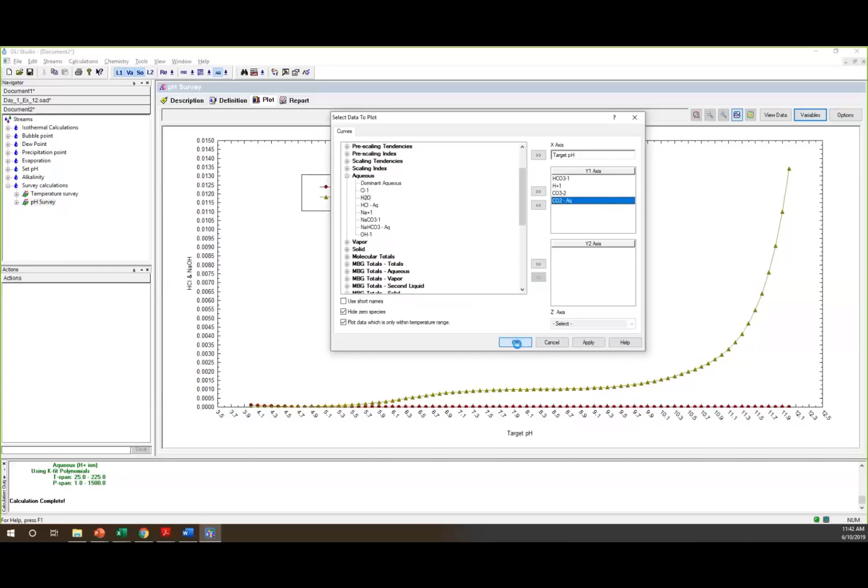Then we can click calculate, OK, in here. And this will give me the speciation of the carbonic acid system for bicarbonates, like how they change depending upon the pH.

One thing I wanted to mention is that the reason the end point for this plot is useful is to explain why the end point of alkalinity pH is 4.5. The reason is because at 4.5, the bicarbonate species below that pH is no longer stable. The species that is stable is the H+ species. So that's why the alkalinity ends here. This is very useful to know. Any questions about this speciation and how to select variables to plot?

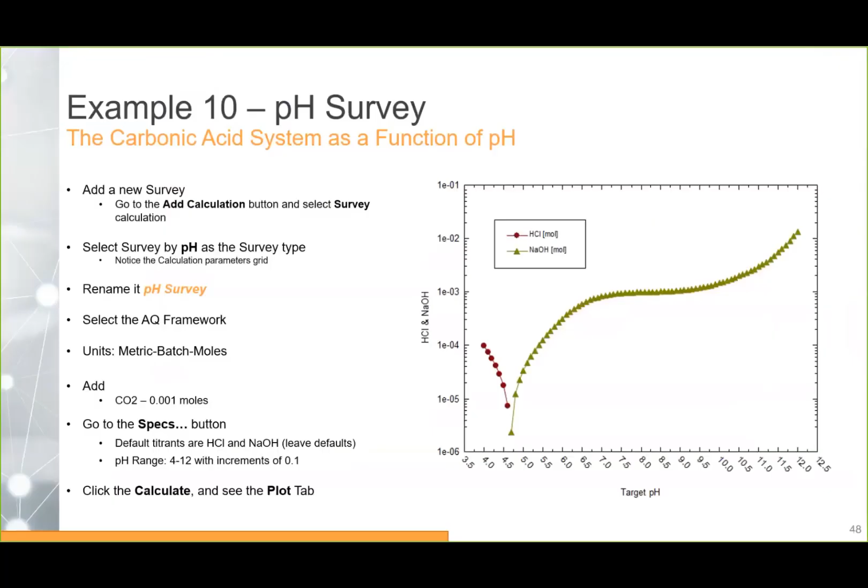Jan, did you manage to create the plot? Yes. That's good, was it very similar? Very similar. Okay, that's good. Yes, it should be very similar because we are not defining a very high concentration of CO2, so they should act very similar.

Okay, so that is our pH calculation. Another thing I want to mention is about exporting and copying your data for future analysis. You have different options to export this data. You can right-click on it and select copy, then take it to a spreadsheet, Excel, and use Control-V or paste option, and you will see your data in Excel. That's one way.

Another way to export your data is as a CSV file, a comma-separated file. You can right-click and say Export CSV, then name it and save it. That's the second way to do it.

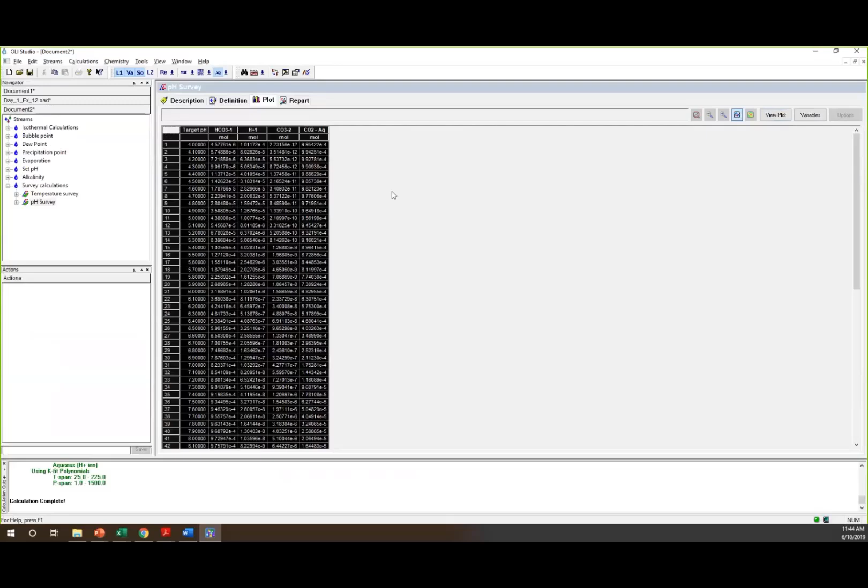The other way is you go to View Data and select this table in the corner. If you click on it, you will select all the data, then Control-C on the keyboard, and then if you go to Excel, Control-V.

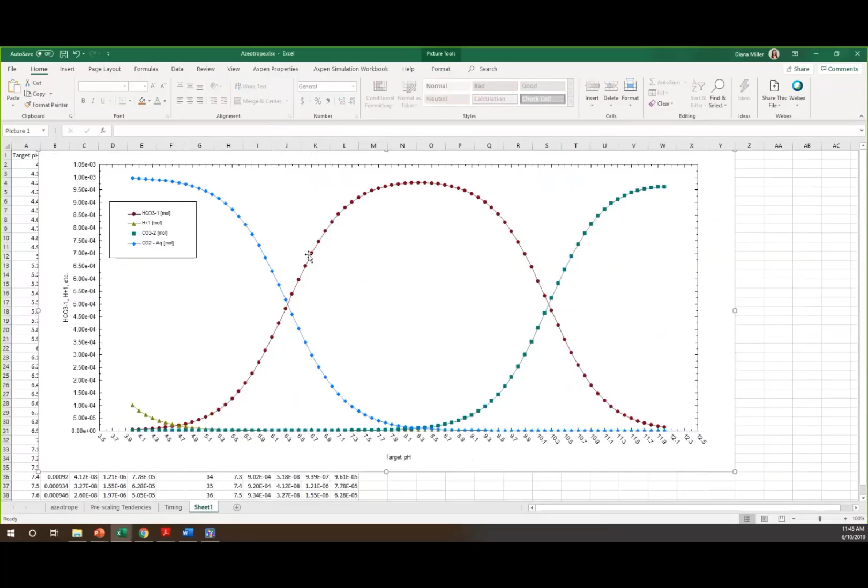And if you want only the plot, you can go back to the plot and right-click, copy scaled image or save image as. This will create the image, and you can paste it in a report for your reports. So you'll have all of these options to export your data.

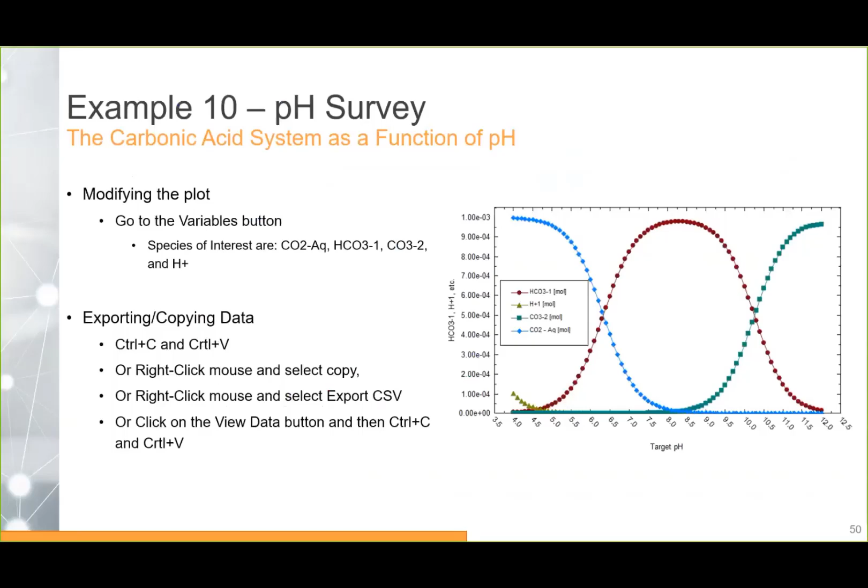Okay, so this is how we set up a pH survey. The next survey we are going to do is the solubility survey. What I want to study in this case is the solubility of sodium chloride as a function of temperature. For this case, we are going to set up a survey, but change the calculation type to the precipitation point. Let me show you what I mean by that.

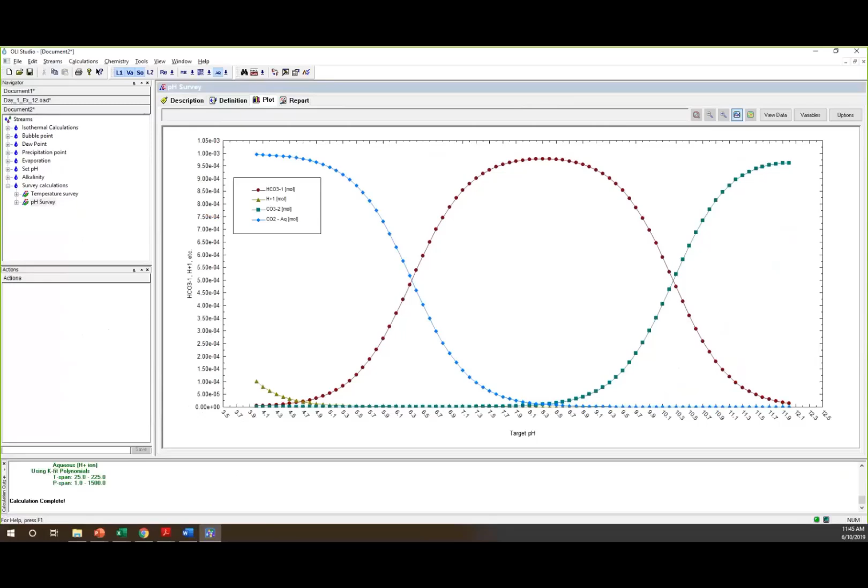Any questions, Jan? No. Okay.

Let's add a new stream. Let's name this survey calc type, because this will be when we change the calculation type in this survey. We are going to use the MSE framework and the units: metric, batch, and since it's solubility, I should use concentration in milligrams per liter, then click OK. The next step is to add a survey calculation, and by default it selects the temperature.

So we are going to rename the survey as sodium chloride solubility versus temperature.

Okay, now let's add sodium chloride to my inflows. Since I want to understand the solubility as a function of temperature, I'm going to instruct the software to calculate that amount. To do that, we need to go to the temperature specs here. The software will ask which range of temperature you want to study, and I think we should start from 0 to 100, with 1 degree C increments. That will be my temperature range.

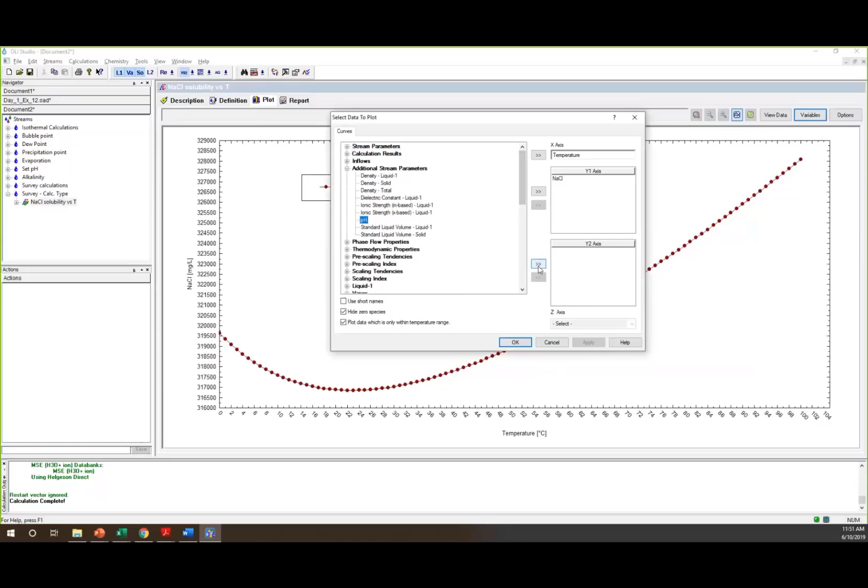You can also add some other variables to the Y2 axis if you want to see, for example, how the pH changes as the temperature and the solubility increase. So you can go to variables, select add additional stream parameters, expand it, select pH, put it in the Y2 axis, and click OK.

And here you will see how the pH changes as both the solubility and temperature increase. You can always save this plot.

This is one of the plots that you will be plotting over and over again. You can go to the plot template manager and give it a name, say this is solubility and pH. Oh, I already have one called solubility and pH. Let's put solubility and pH 2, and then save it.

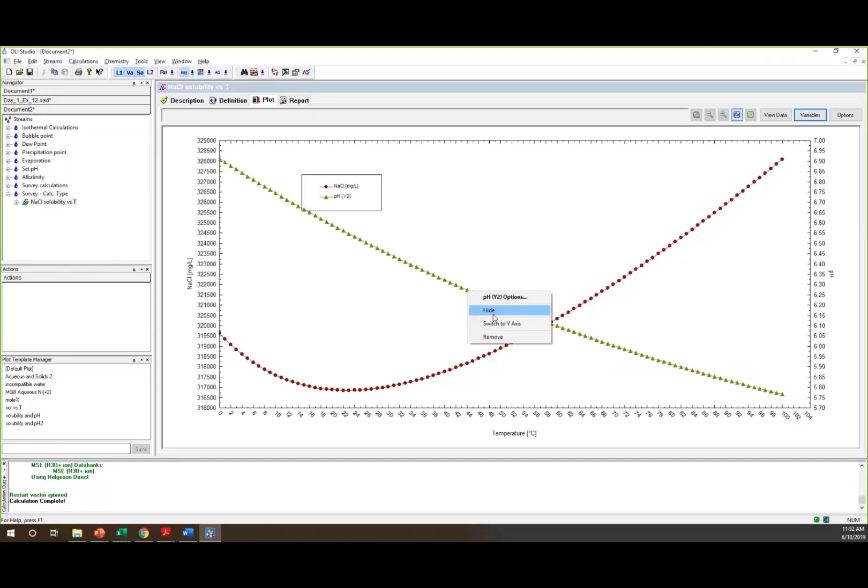Now if you want to go to the default plot, you can always do that, or if you want to see the pH and solubility plot, you can select it. And if you want to get rid of this pH line, you just right click on a data point and say remove or hide. Let's remove it and go back to the original plot.

Okay, so any questions about this? How do we set up a solubility versus temperature calculation in the software?

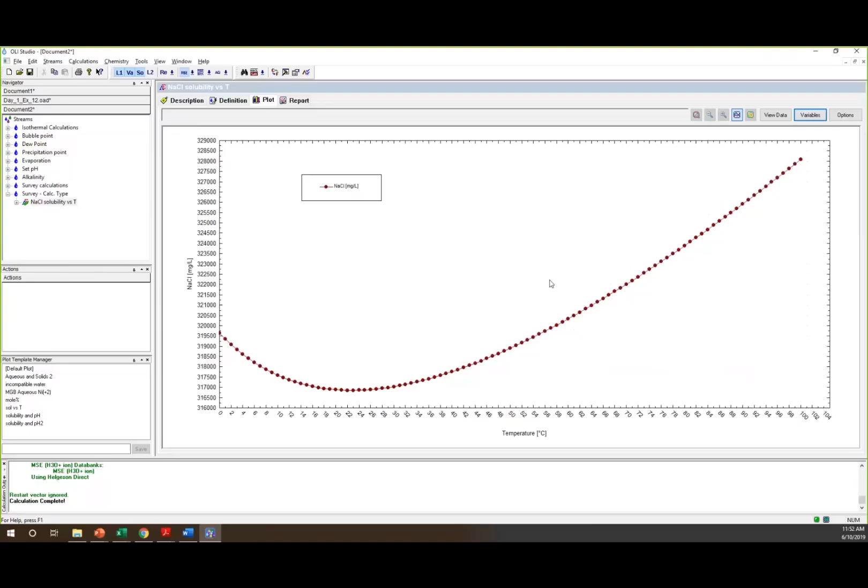Am I going too fast? Nope. Okay, good. Oh, it's good.

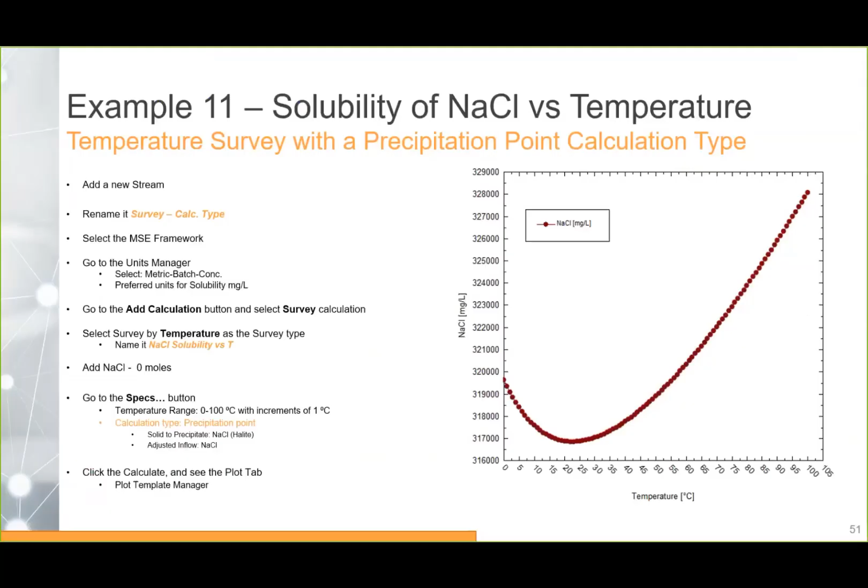Okay, so it seems we have about 7 more minutes. What I'm going to do is run one last calculation: the boiling point versus the concentration of sodium chloride. Then we'll have some other examples for the beginning of next class, and after that we can start with the water analysis.

So for this example, we need to do a survey, a composition survey, and we want to use the bubble point calculation type. Let's go back to the software.

Let's create, under this survey calculation type, a new survey, and let's name it boiling point versus composition, a long name so that we don't forget what that calculation was about. Then let's select the MSE framework.

I want concentrations in metric batch concentration units. We're good. Then we need to select the survey, change it from temperature, and let's change it to composition.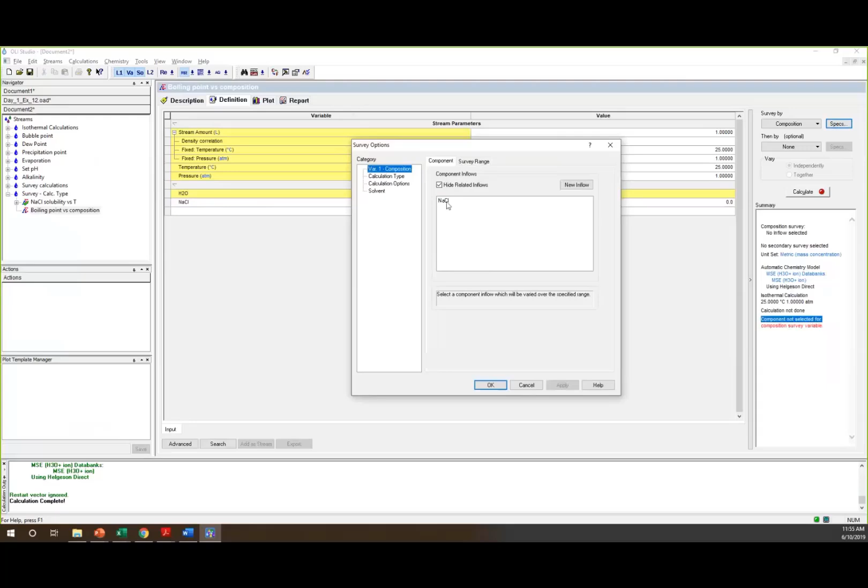And since I want to vary the NaCl, I don't need to enter a value. In fact, the software is saying the component that you want to vary has not been selected for the composition survey. So what you need to do in this case is go to the specs button, and it will prompt you to this window where it says, okay, what component do you want to vary? And I say NaCl, and I go to the survey range, and I say, okay, I want to vary this

concentration from a very, very small value, from 1 milligram per liter to 300,000 milligrams per liter. Okay, and these are a lot of points. These are too many points. I don't want to calculate this many points. So when we are doing the survey calculations, we also have the option to plot in the logarithmic scale. Okay, so let's select this log scale here, and I'm going to instruct the software that I want to calculate only 20 steps.

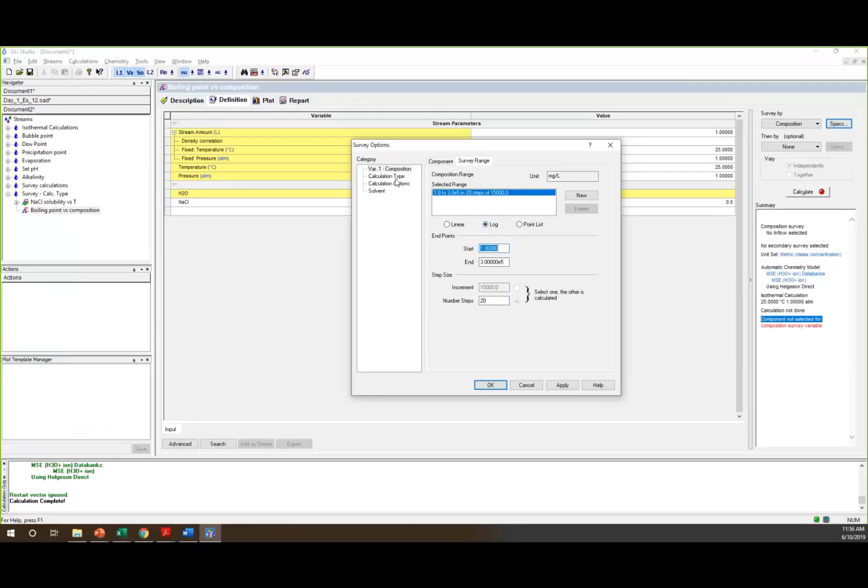And that means that the software will change the concentration every 15,000 milligrams per liter. That's good. Now, we don't want to study at one temperature. We want to study the specific boiling point. So we go to the calculation type and then select the bubble point calculation. And I want the bubble point temperature. And then click OK. Now we're good to go. Notice that now the NaCl is yellow, meaning that it will range in the concentration that we put. And now the calculate button says, okay, we are going to calculate bubble point temperature. And we are ready to calculate.

So then we can go to the plot. And in here by default it is showing me the boiling point as a function of sodium chloride. But I'm not happy with this plot. It's very difficult to read. It's cluttered in the corner here. So we can do logarithmic scale in the x-axis. So right-click on the x-axis and select logarithmic scale. And now you can see an easier to read plot.

And you can see that as the concentration of sodium chloride increases, the boiling point of this solution also increases. So, for example, at this 300,000 milligrams per liter, the boiling point is 106. Okay, so any questions about this specific calculation? This is how we set up the boiling point as a function of NaCl composition.

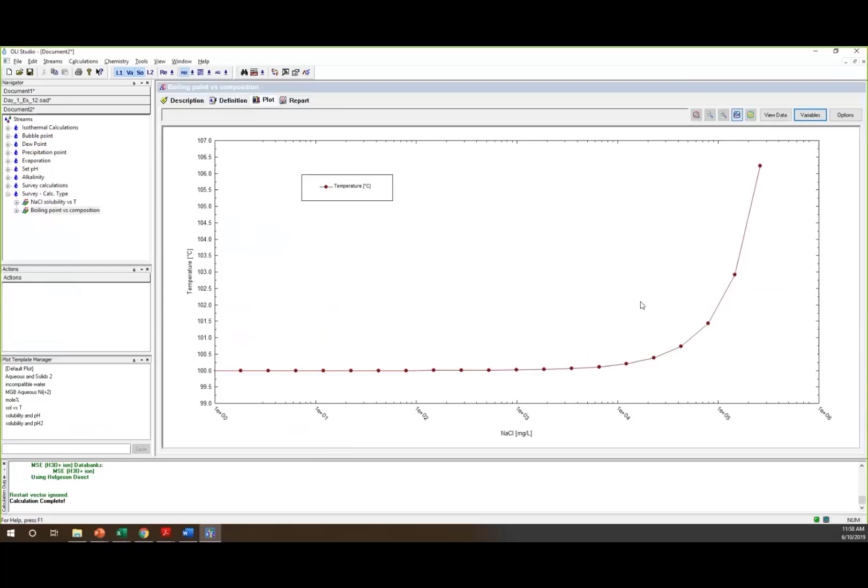My calculation button doesn't turn green after I follow this step. Okay, so do you see any error? Are you seeing an error or is it saying that you need to select something? It's red, so if I do that, it says component not selected for composition. So what you need to do is, next to the composition button here, go to the specs. And select NaCl. Okay, I thought. Oh, okay. I didn't click it. I have to click. All right. Select it, and then go to the survey range, and you will be able to put the range that you want to study. Yeah. Okay.

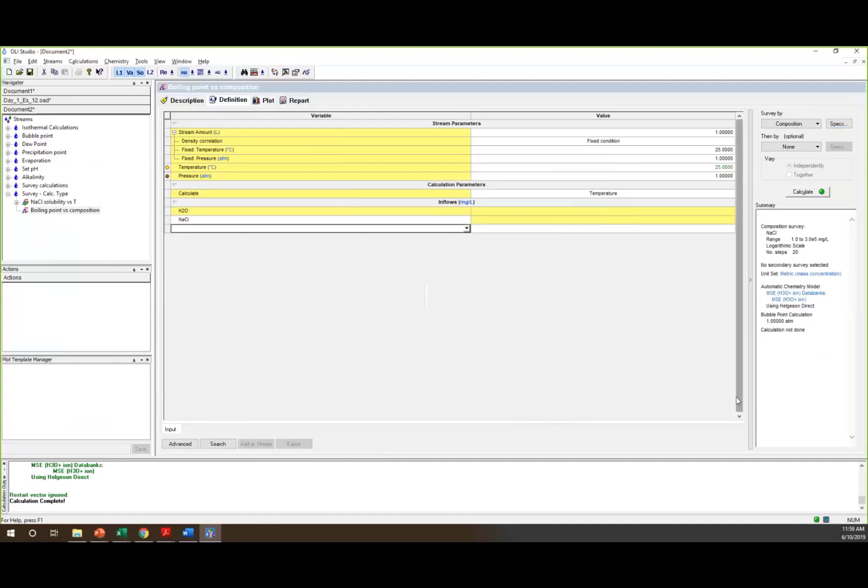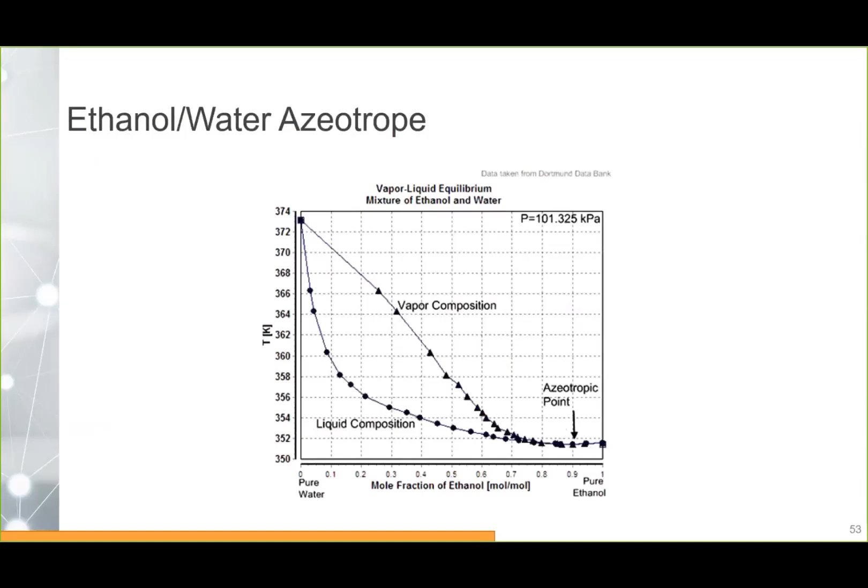Okay, so it seems it's 12 now. This is the end of the first session of this course. Next time we will be able to do a little bit more of calculations for the survey type of calculation, and then we will start moving towards the water analysis. So we will stop here, and then we finish the survey calculations next time.